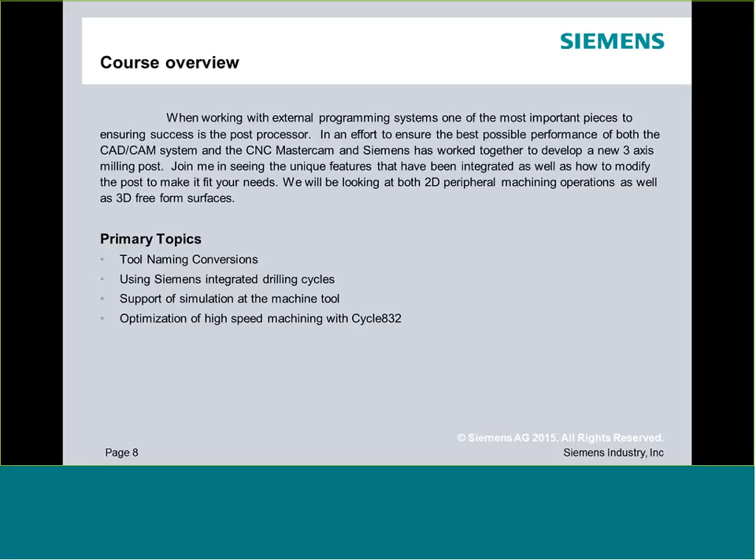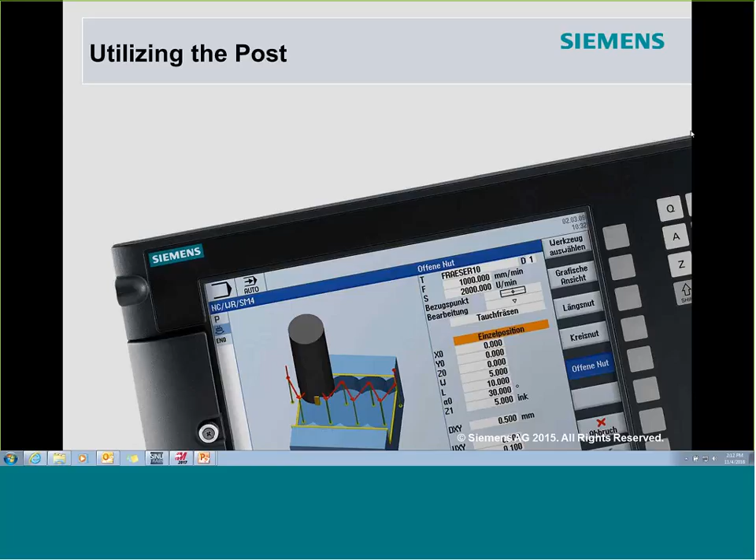So we're going to start with utilizing the post, with a couple simple scenarios. These would be the two examples we're going to look at. Again, these are pre-canned little routines that I came up with to give us some talking points and to show you some functionality. We're going to do some basic peripheral or 2.5D milling, and we'll also look at some of the free form stuff when we look at high-speed cycles, cycle 832, that kind of scenario.

Now the posts are supporting both X9 and the latest version 2017. So when we show you where you can get the post, or if you're going to request it from your distribution, you can ask for either version. We're supporting back to X9 and the current version.

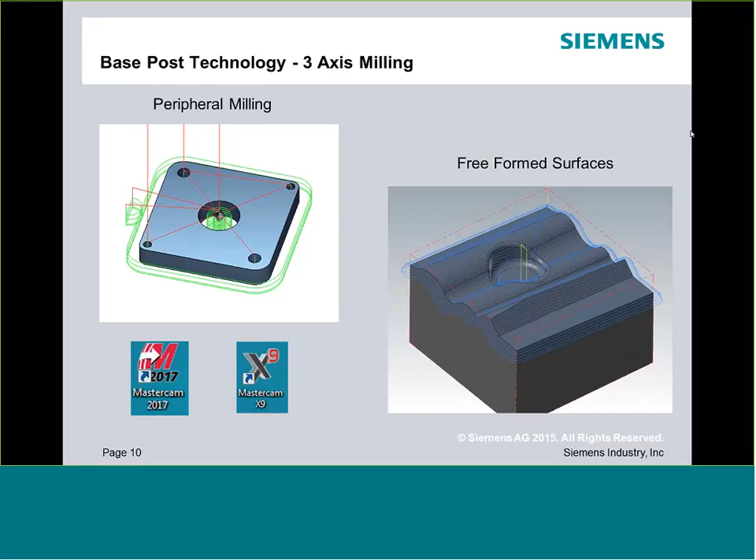So probably the first question you might have is, how do I get the post? How do I physically get the post? In the past, Mastercam used to just embed the posts in the install package. They still do that for the standard posts they have, but this new post gave them an opportunity to apply a different concept that they've been playing around with.

So what they're doing now is they're actually putting the posts up on a standard forum where you can go and download it yourself. This way, if there are any changes that need to be made for server, management control, version control, it's very quick and simple for them to make an update and put it up on the website. They don't have to worry about waiting for a new install package to come out.

So there's really two ways you can start to see this. First and foremost, if you go to the mastercam.com website and you select posts, you can drill down and get a full description of the post. And here there's some links where you can request this through a reseller. But additionally, if you have a login here, you see on the screen where we have register or login.

As long as you're a user with a licensed CNC Mastercam, you can have a login, and once the login is in place, you have the ability to go to what they call Tech Exchange. In that same pull-down under support, a couple spots below post, there's a section called Tech Exchange. In Tech Exchange, you can select the version you want, and it'll give you a list of whatever's available for the version.

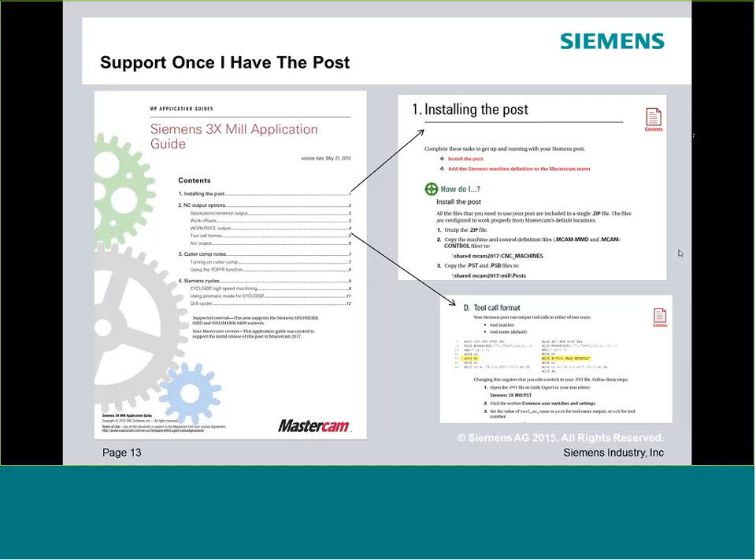So what are you going to get outside of the app guide when you download it? You're basically going to get these 5 files. There's the PST file. That is your post file. It's going to be called Siemens 3X mill.pst. There is a PSB file, and that's an encrypted file that goes along with the post. And then you have 3 other files as well.

Now, it's worth noting regarding the PSB file, there was some specific content in the post that we didn't want people to be able to potentially get into and mess up and affect the functionality of the post. So that's what the PSB is really doing here. It's not limiting the use of the post. As long as you have a legit seat on the system, the post processor is going to work.

In the past, some people used the PSB file to license the post to a specific seat. For us, this is a wide open post. It's going to work for anybody that has a licensed seat of Mastercam.

Additionally, you have your machine definition file. That's got the MMD extension on it. And you have a control definition file. Now, the machine definition file, there's 2 here. One supports inch, the other supports metric. Everything else is really universal.

So as we kind of go through this, the post file, the control def, that'll adapt based on whatever unit of measure you're in. I think older posts used to have unit dependent posts all the time, and then you're dealing with all these different posts and version control. So they're trying to make everything as unit independent as possible.

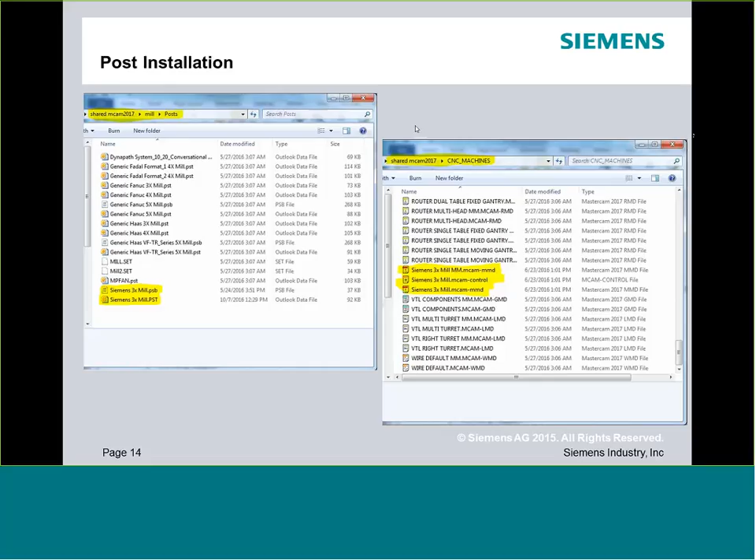So what are we going to do with this post? Well, this is going to be the basic job we're going to play around with. So we're going to take a very simple profile. We're going to do a little milling on the outside of the profile, a little bit of drilling, some tapping, and we're going to mill a hole in the center of it.

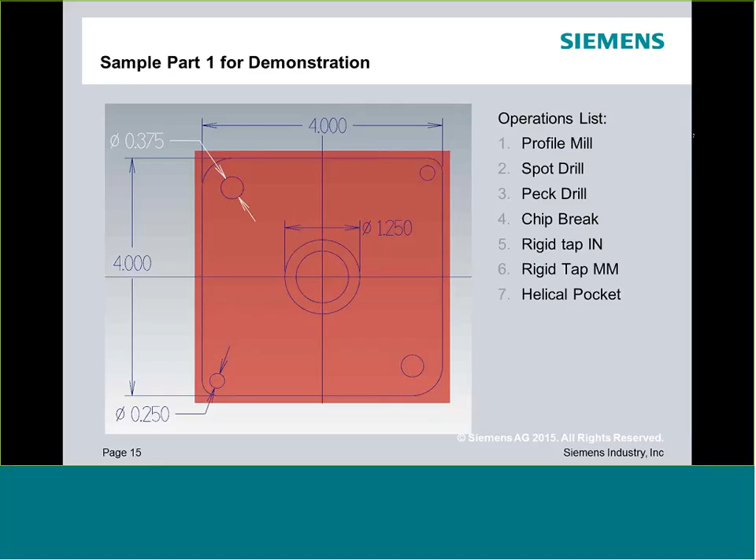So I just wanted to use this as an example to give us something that we can play around with all these different triggers that are starting to be built into this post, and you can start to see how you can tailor it. So first things first, why don't we just go through the process of grabbing the post, outputting some code. Let's get it over into our control, and let's do some initial simulation. This way you can kind of see the whole process that it would take, and then we'll start cutting it apart a little bit and showing you some of these different features or functions.

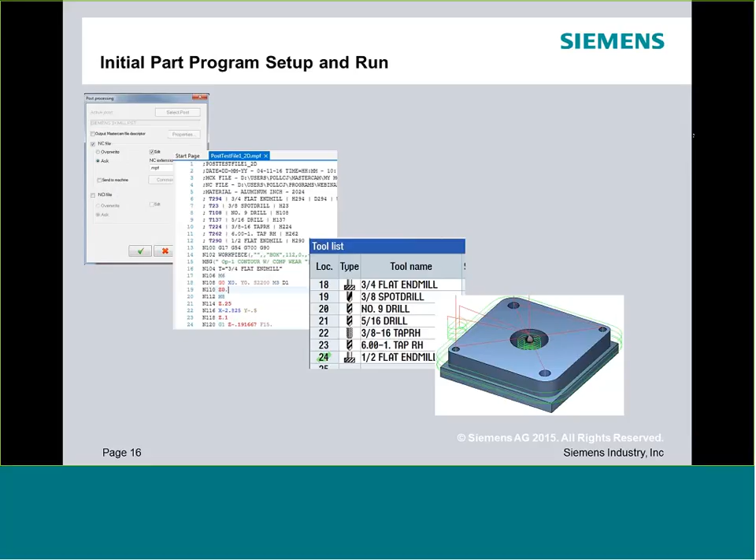So what I'm going to do here is I'm going to just switch out to Mastercam real fast. And this is the pre-created part. So I have a bunch of toolpaths built here. Now, I've already built this selecting the Siemens 3-axis post. Had I not, or I was doing a new one, I can go in and I'll be able to select the post. So right now, under mill operations, for argument's sake, you can see I have this post selected.

When you first drop the files in, it's not going to be in your list of whatever machines you may have selected. So you just go to Manage List, and you would find the post down here, and then it's a matter of just clicking it and adding. So in this case, I could add the metric one because I hadn't added it to my current copy of 2017. So if I plug that in there, now when you go in, you're going to get it propagated in the list. So you may have a bunch of different machine posts or control posts in here. Once it's in the library, now you can just pick it and go, and you're going to create an operation with that post.

Okay, so we have some toolpath. Let's just select this toolpath, and we're going to output some code. So here, just like you would any Mastercam file, we're going to select output. We will see the post name, so you would want to validate that. And let's post it out, and we can start to see what we're dealing with initially. Okay, so I'm just going to let it overwrite what I was playing around with before. And we are going to get our first output. Things always run a little bit slower when I'm logged in with all this stuff. There we go.

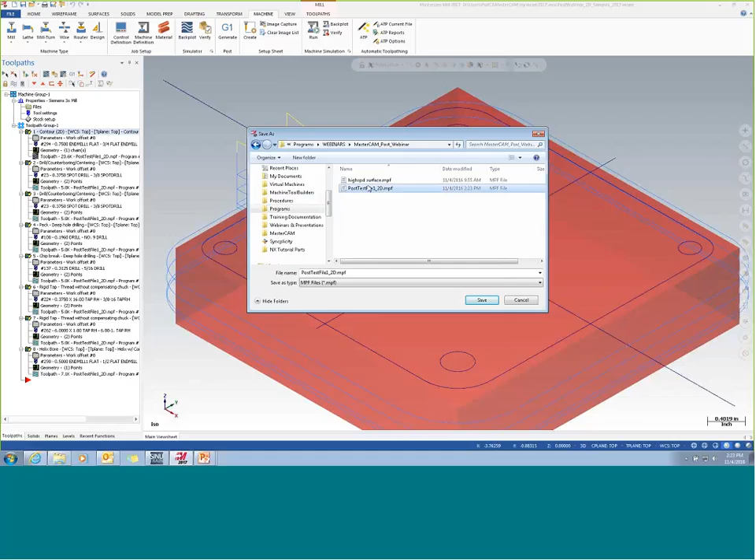I'm going to repick this. You always have this stuff all set and ready, you think, and then you make one little change and everything goes bye-bye. Oh, there it is. Oh, it should still be there.

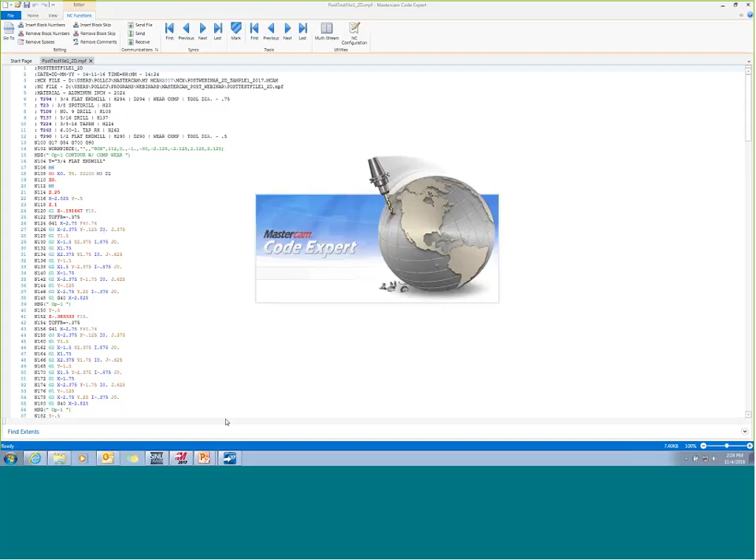Okay. Oh, let me reload this machine. It's like it's not updating in my directory on my end.

So what I'm using here right now while I'm reloading it, this is a piece of software we call SinuTrain. It's a control emulator, so basically it's going to emulate everything I can do on the control. Here I had built a simple little machine that I was going to use as my mock 3-axis machine, and I just created a shared folder. That's why when I was looking at it, I was seeing that I was posting that folder. It was certainly going into that folder, but I wasn't physically seeing it once I went into the machine, so I may have to just refresh it. Sometimes when I'm logged in, strange things happen when you're in these webinars.

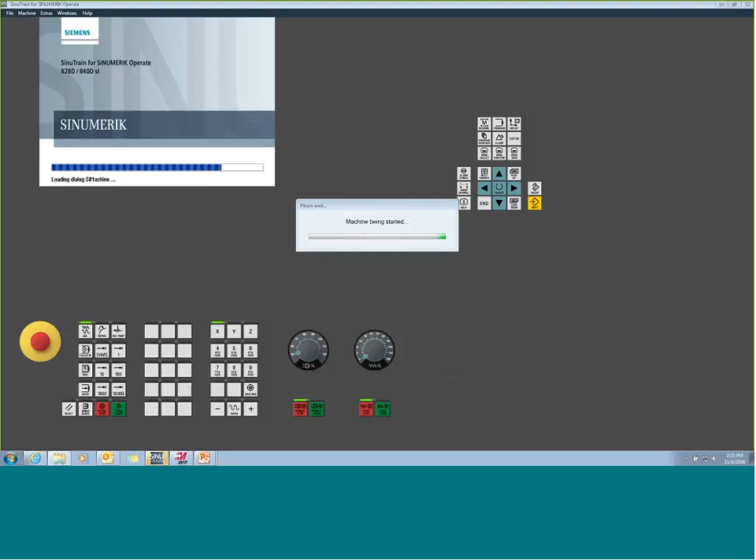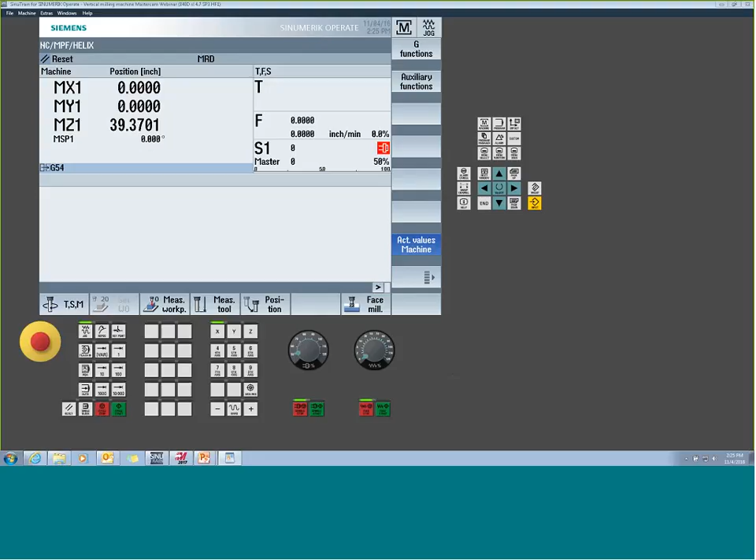Okay. So that is back up, and I just opened that file externally just to prove that I'm not absolutely going insane. And it certainly should be here. Okay, there's my webinars. Ah, there we go, perfect nougat, I like to call that.

Okay, so I output the file. Now, one of the things I'm going to show you, and one of the first things we wanted to show you that's kind of unique in the Siemens control, is we have the ability of calling what's called named tools. So you see right there in the tool call, the physical name I'm calling up in the tool isn't a number, it's this 3/4-inch flat end mill. Well, it's really nice that they're giving us a full list of the tool libraries, because when it's time for me to set up a part program to build the file, I don't want to have to go searching through the program to find out what the names were associated with it.

In the same token, I'm going to have to go over and create these tools. So what's nice is as long as this name matches the physical tool call, it's as simple as just copying and pasting the name over into our tool table. So when I go to build up my first run, build up my tool library, it makes it really quick. I can just come in, select the type of tool I'm using, and just copy and paste the physical name right into it. And that's how I would start to build up my tools.

Now, certainly I didn't want to have to go through building all 8 or 9 tools I have associated with this, so I just wanted to show you the one. But having that full library there available to us will quickly allow you to start to build up and get the tools physically in the machine. Now, it is possible that we could have created an external file and then run a part program to pre-populate that. That's certainly something you could explore down the road.

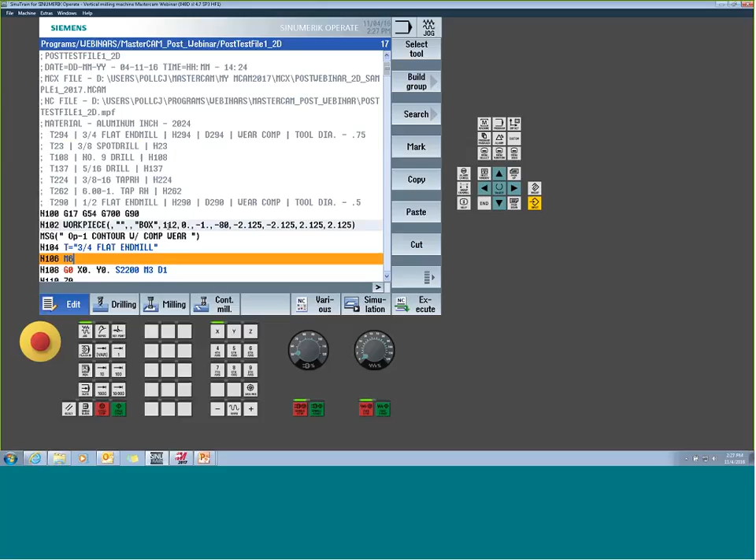Now, additionally, we've added some different things that we're going to start to see here to support graphic and so on. But what the end toolpath is going to look like for this job is going to be this. So here we come in, we start to see some simple profile milling, walking around an output. Then we're going to get to drill a couple holes, center drill, some peck drill, some chip breaking cycles, and then we tap a few holes. And we end up with a little helical interpolation.

So the post is already set up to anticipate all these different types of operations and handle them. But there are areas that you're going to want to tweak, that we're going to want to change around a little bit. Maybe you like the tool call we were talking about. Maybe you're a shop that doesn't like to use name tools, you want to use number values.

So what we're going to do is I'm going to show you all of these unique triggers that we've embedded into the physical post.

Bring up the PowerPoint. So when it comes to modifying the post, there's going to be 2 basic files you're going to modify. You have the control definition file. That allows us to do more global types of adjustments. Maybe I don't like the sequence numbers the way they're coming out, you can change that. Maybe I don't want to break up arcs, or I want to break up arcs every 90 degrees.

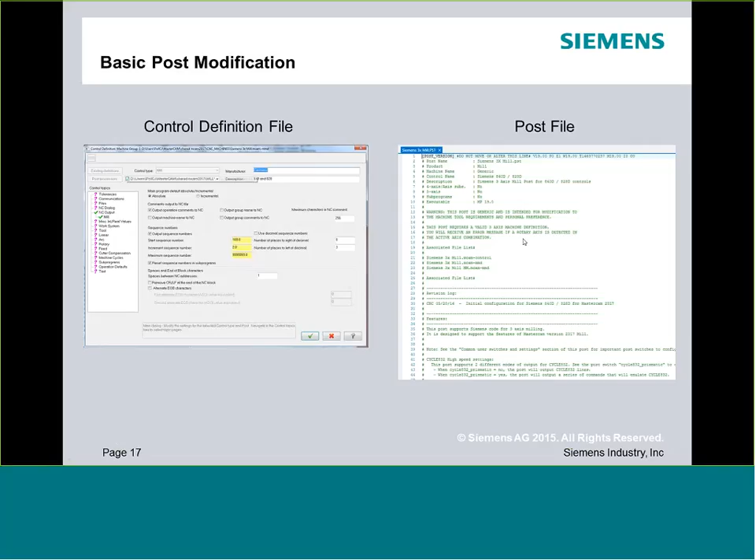Now, that kind of stuff you can change around the control def. But when it comes to really being able to modify the output, we're going to go into this post file, and in the post file we're going to start to show you some of these triggers that were embedded, and we're going to be able to modify or adjust this output by going into that given file. So what we'll do is we'll take a look at a few different features and functions, and then we'll go in, we'll modify it and output it, and you can start to see the difference in the result.

So first and foremost, we had to really think about compatibility and controls. I mentioned earlier that this post supports both 828 and 840, and there are some slight nuance changes between those two controls. So what we did, and that's why it was so important for both Siemens and Mastercam to partner together and not leave this up to maybe an independent reseller or even in times the OEM integrating the control, because who's going to know the Siemens control better than Siemens, and who's going to know Mastercam better than Mastercam?

So it really worked out well for the two of us to come together. We could kind of steer Mastercam in knowing where there might be areas that we want to pay close attention to. This is one of them specifically we're going to talk about here in a sec. And they can then tell us how we can fit the CAM system around these scenarios.

So to give you an example of just making sure we had commonality, one of the big differences between the 840 and the 828 was how we handle work coordinates. So both controls support G54 through G57. So what you see here in the Mastercam interface is if I manually drive the work offset and I give it a value of 0, I'm going to get an output of 54. If I go up through to a number of 3, it's going to give me all of those consecutive work coordinates up to G57.

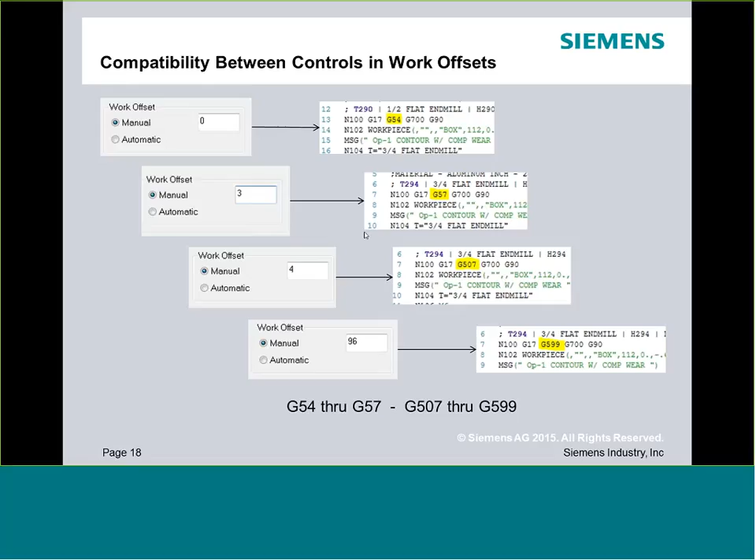So what we decided, to make it the simplest and easiest without having to support two separate posts over just a couple of work coordinate triggers, is that we would then jump over to 507 and then support from 507 right up through our extended 599. So it sounds like a very simple scenario, but if you don't anticipate this, now all of a sudden you can have a post in the field that's writing a G58 to an 840 and it's not going to work, or vice versa, writing a 507 to a 828.

So additionally, we started to say, okay, how do we handle tool naming convention? That's kind of tricky. We don't want to tell you that you have to adopt one convention or the other. So first, we wanted to see if we could support the tool naming convention, and that was pretty easy to get going.

What Mastercam was able to do for us was link the output name to the tool name that gets used right in the interface for developing the tool. So if you built a tool and named it, or once you bring it into your operation, whatever name is there is the name that's going to get driven out to the output code.

But what if I don't like named tools? What if I'm just used to, because I've been doing it for the last 30 years, using tool numbers? Well, that's okay. We're not forcing you to adopt this.

But what we did was we decided to put a trigger or a switch inside the post. So as we go into the post and take a look at it, you're going to see there's a switch called tool as name. And it's as simple as changing this to a yes or a no, and that's going to completely change your output structure.

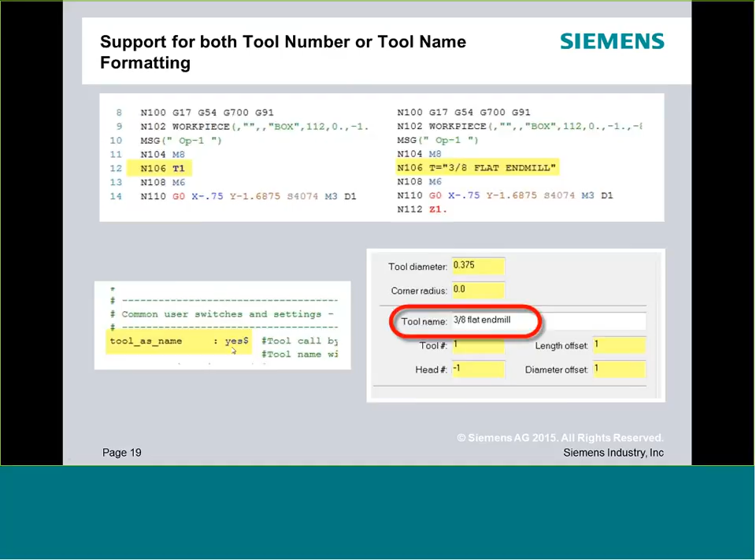So what we can do here, let me just switch back over to Mastercam, is we can start to show you where you find the triggers and how you start to modify them. And then we can start to see the difference in result.

So I'm just going to work on our contour one operation. If I was to look at the contour, physically under the tool information, I see that there is my 3/4 flat end mill. So this is the name that's currently being driven when I hit output. You saw it earlier when I output the whole program, it was outputting the T equals and this name.

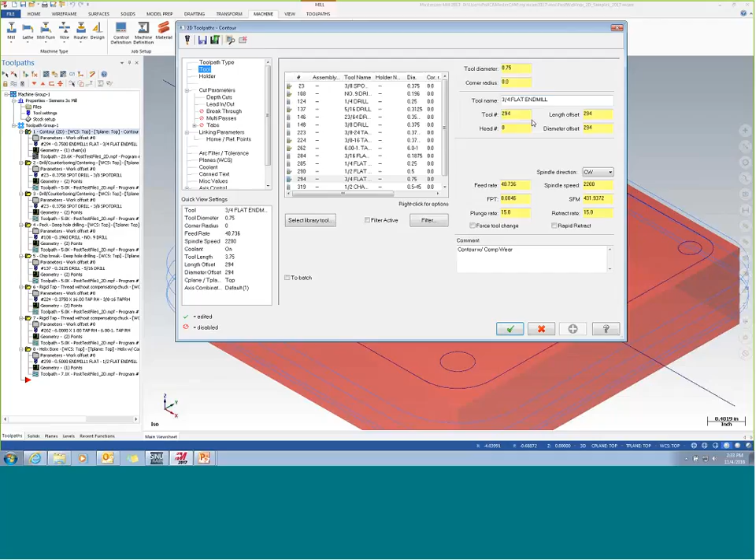So if I want to drive off the tool field, which in this case happened to have 294, it can certainly be any number you want, I now have to go in and change the post. So if I first post out this operation, or any operation for that matter, it's going to open up my editor. I'm just going to let it overwrite the file that I had there.

Oh, I have to watch this. I have the file already open on my end, so it's yelling at me that it can't rewrite the file because it's open by my other software. Okay, so let me just shoot this out again. Boom, boom, we'll overwrite that file, save us a couple key strikes.

Okay, so the editor comes up. You see here we have our standard 3/4 inch output.

So now what we want to do is open up that PST file, the file that you copied. You could open this up into any external editor, but you can also open it up right in Mastercam. If you use the Mastercam Code Expert editor, it actually puts you right to the correct path, so you don't have to hunt for it. But you do have to change your file extension type and make sure you hit Post Files.

From here, we're going to see somewhere in the list the Siemens 3-axis PST. Now, you're not going to see the PSB because you're not going to be able to edit that anyway, and you don't need to. We're just going to pick the PST file, click Open, and it's going to open up like a text editor here in the code editor.

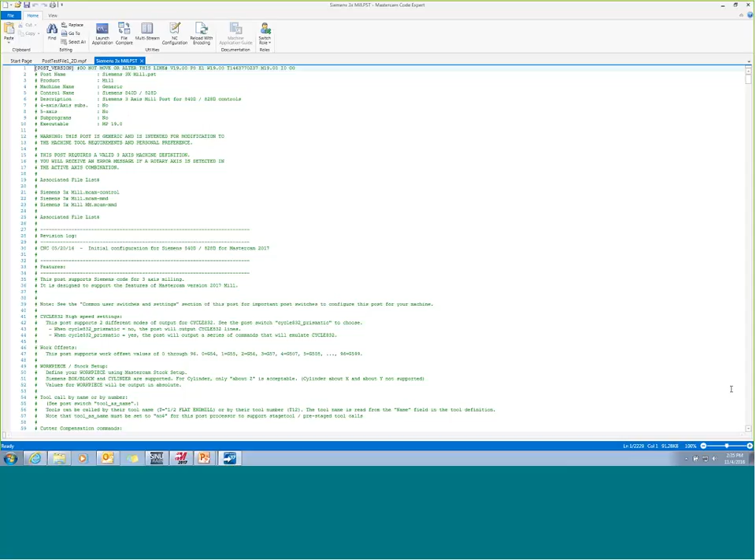Now, this first section is all commented out, that's what the pound signs are. But there's a lot of detail here. So if you want to start to learn what this post is capable of, all of these triggers are well documented with all the different features. Like for argument's sake, we were talking about the work offsets. Well, we see right here, G54, G57 is number 3, number 4 goes to 507. So there are a lot of great comments here.

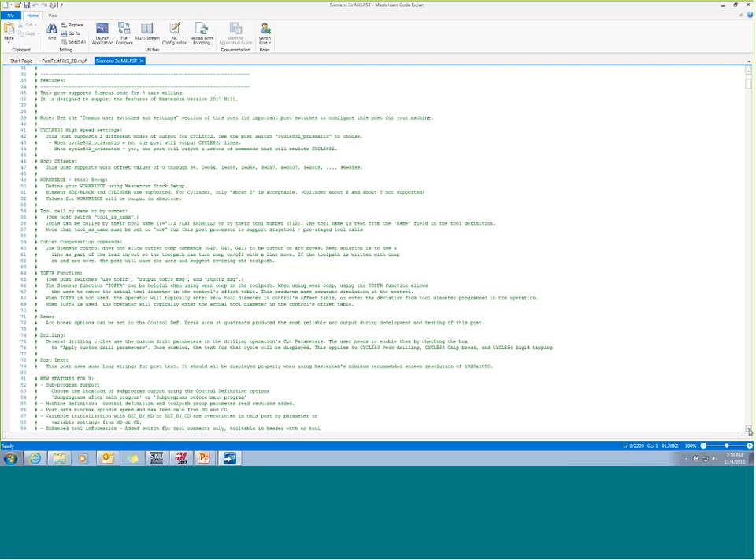So if I start to scroll down, it starts to talk about the tool naming, telling you how we handle some of this functionality. And then if you move down just past all the comments, you get to the start of the post, first thing you're going to see are these switches. And the switches is what's going to start to change this functionality.

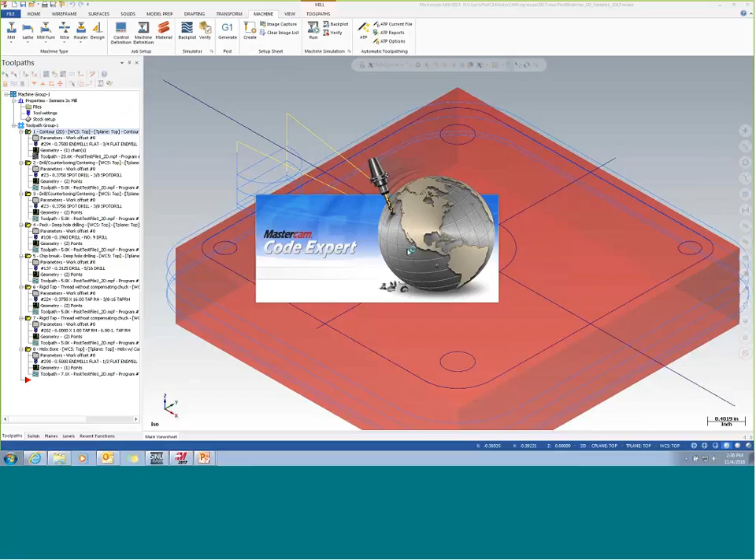So it's really as simple as coming down to where the system says yes, changing it to a no, saving the file, and closing it all up. Now if I re-output this file, you're going to see I get tool 294 as opposed to what we had earlier, which was my T equals 3/4. So there's my tool 294.

So now we can quickly adapt this post to how the user wants to use the system, as opposed to us telling them, well, you have to do named tools or you have to only do numbered tools. It's a matter of changing that trigger. Now, I want to say the default post, I think, comes out when downloaded with named tools set. So it's just one of those things you want to be aware of.

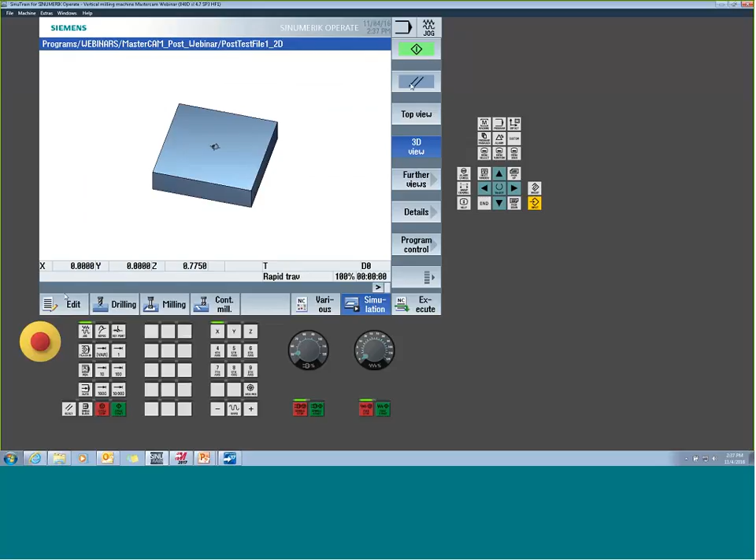Now, from the control standpoint, if I was to start running this file, here you see there's the updated one with 294. Well, 294 now has to exist. So if I go to simulate, it's going to tell me that tool is not there. So the 294, there you go, illegal tool number. The 294 is being driven by whatever is in these named fields.

So if I wanted to create a new tool, I could do that. I could rename one of the tools, but let's say I'm just going to create a new tool. So now remember, it's T294. Well, you're only going to put the numerical value, 294, in the tool name. The T is automatically understood. So we'll just make this a 3/4 inch tool, however many flutes I want.

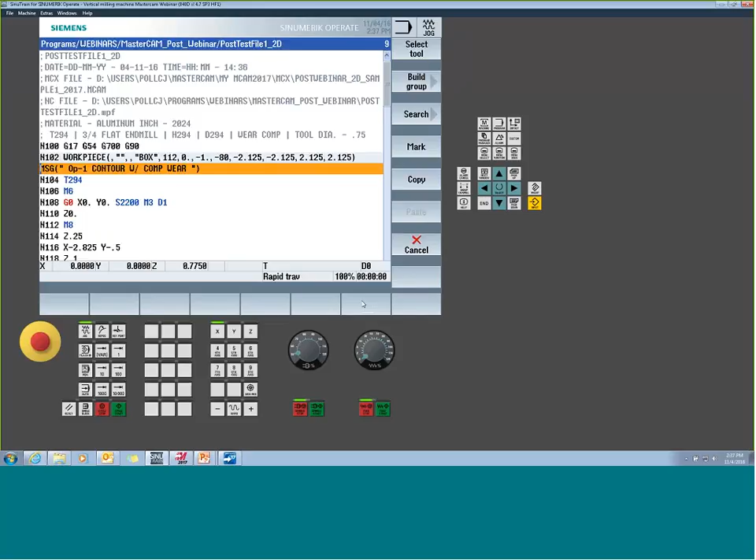Now if I come back, since 294 now exists, this tool is set up, we can start to simulate. I touch off some offsets, I could actually start to run this program. So we'll support either one. It's really up to you as a user how you want to adapt it. So there you go. So now we're starting to modify our post. I'm going to come out of here. We're going to switch back. And now we're going to look at how do we start to support the simulation.

So you've seen the block, the physical blank come up in our graphics. We were just looking at that. So how is that being driven? Well, what we did was we had to look at the way Mastercam has a bunch of different blank configurations, and we're certainly more limited to what they can do. So we really just kind of fit this around what we could support from the Siemens side.

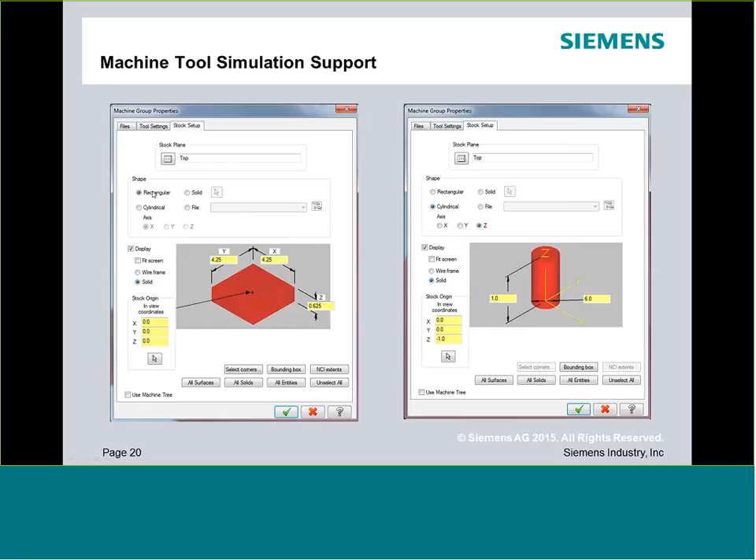And in Siemens, we support either rectangles or we support cylinders, and specifically cylinders oriented in a Z orientation. So as long as you choose either one of these two options, the end result is going to be an output blank line, which is called a workpiece, and it's going to be pre-propagated. It's going to support any of the orientations.

So, had I gone back to Mastercam and I looked at my stock setup, I can have my orientation point in any of the corners, in the middle. That's totally up to you. Bottom corner, it will propagate the right fields. I can pick cylinder. But had I picked, let's say for argument's sake, solid, then it'll actually tell me that it can't build it because we don't support that configuration.

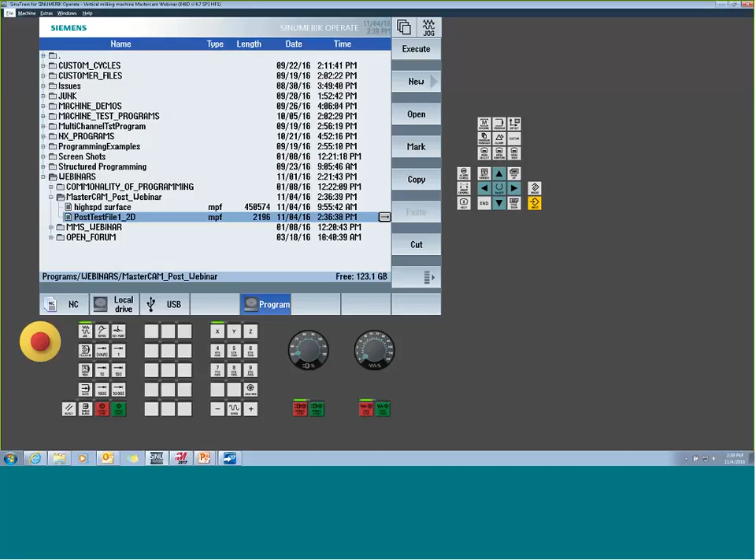So I can still use solids, I can still use files from the Mastercam side. The only difference is I'm not going to get a blank output. So if I look at the G code and I physically come in to this one, you just wouldn't get the workpiece blank. So from our perspective, you could see simulation as a wireframe. I could see the toolpath come around, but I'm just not going to get my visual with the physical solid model like you're starting to see here.

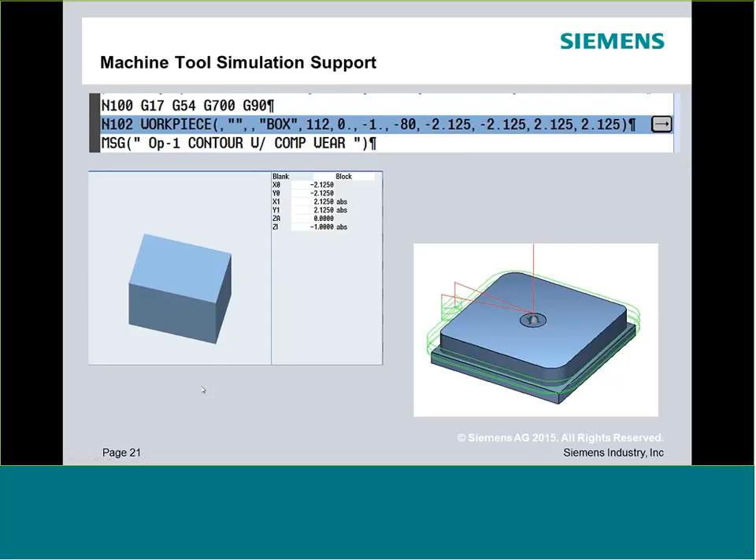Okay. So from there, we started to talk about tool comp. And tool comp can sometimes be a little challenging, especially when we're dealing with a control that has full 3D graphics and simulation. So we support all the tool comp variants, but the one that's always the stumbling block is comp wear.

So for those of us that maybe aren't familiar with the terminology, comp wear is always going to output a G41 or G42, but the toolpath output is already going to be offset by the tool radius that you used in your CAM system. So what happens is when we get to simulation on our end, we are going to expect you to give us the tool diameter or the tool radius in our tool table. This way I can show you what the size of the tool is.

But in comp wear, it's already been compensated, so they're expecting you to put a value of 0 in the tool table. Well, once there's a value of 0, there's no physical cutter diameter, and I don't get any simulation. So what will happen here, and you can see it in this little picture, you're going to go in, you're going to set up a 3/4 inch diameter, or the radius equivalent, depending on how your machine's set up, and you're going to run it, and you're going to get this huge output because you're going to get double compensation.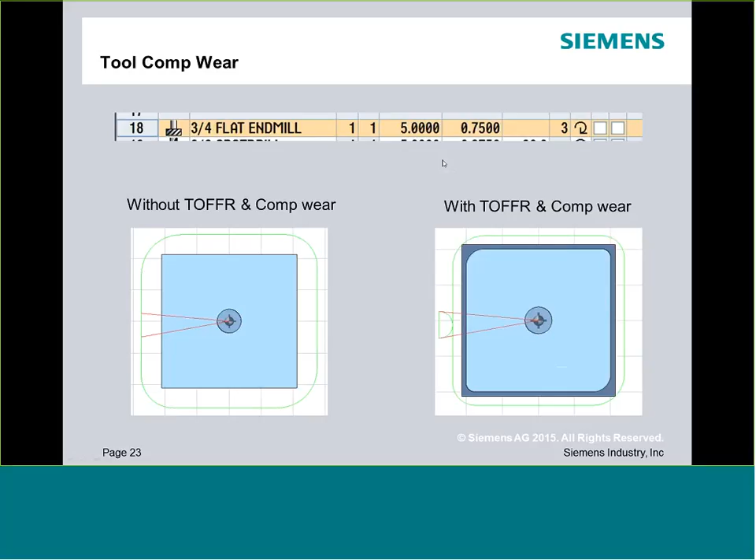So what we decided to do is leverage a little command called TOFFR. What it does is it allows us to modify the radius on the fly. And the end result is going to be giving you true toolpath compensation. I still get a physical comp output, but I now can give the system the full diameter. So we're going to show you kind of what that looks like a little bit. Let me jump back over to here. And then we're going to show you how to potentially disable it had you not wanted to use it. Some guys may be so used to always putting a value of 0 that they don't want to have this extra step, and that's certainly okay.

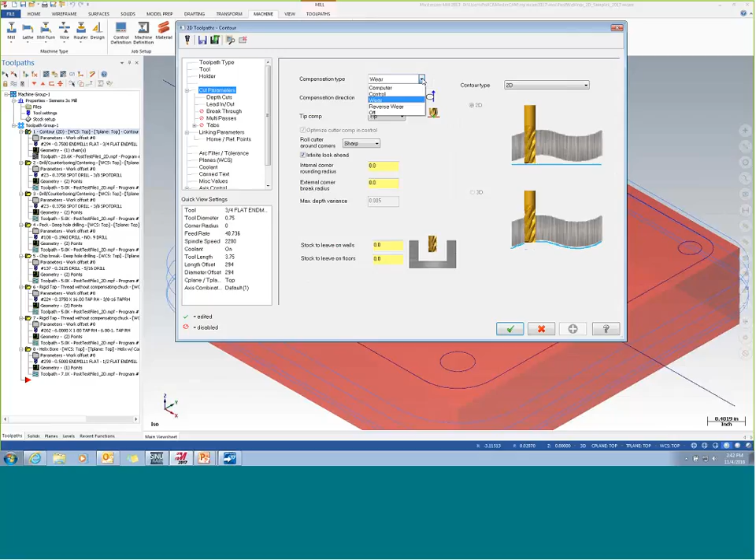So if you look at my program here, I have specifically selected wear as opposed to one of my other comp strategies. So if I go through wear, I output my toolpath, what you're going to see, because I have the trigger put up physically on, you're going to see a new command come in.

Did it again. Let me get out of here. Yeah. Sorry, guys. I got to remember to stop editing the file before I try to rewrite it.

Okay. So I output it. I post it. And what you'll see with the TOFFR function loaded, you will see this statement come out, TOFFR. And what TOFFR does is it says, modify the active tool radius. So we're saying, okay, you told me I got a 3/4 inch tool in the tool table, but I already know this toolpath has been compensated by .375, by half the tool. So we're just going to remove it. So it's kind of like fooling graphics. Simulation sees a full cutter diameter, but I don't get double the compensation.

Now, in this case, we have it output a couple times. This is not additive or cumulative. So once it's there, it stays until you adjust it, and it would get canceled on the next tool change. So if you happen to output it and it's a little redundant, it's not going to keep building on itself. That's absolutely okay. But what it's doing is it's now keeping us from getting that double compensation by this simple statement. Now, if you want to get rid of it, or you don't like that functionality, you can go in and we can certainly modify that. So that's where the other trigger comes into place.

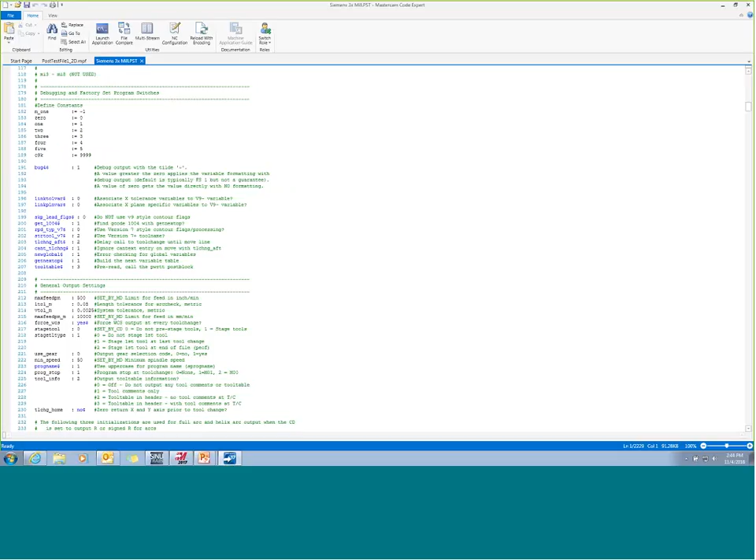So if I go back down to that same section that I had before, and we'll just run right down to it. One more step up. So we have TOFFR. Let me just bring it up on the screen a little bit more so you guys can all see it. So this is the same scenario, and if you read through it, it'll tell you yes or no. Now, we did put an extra message in here because if a guy's still not familiar with this functionality and it's at yes, you may want to warn him that this is going to happen, because he's going to go and put a 0 for his tool comp and he's going to get the other effect too. So we want to be careful that people understand exactly what this function is doing.

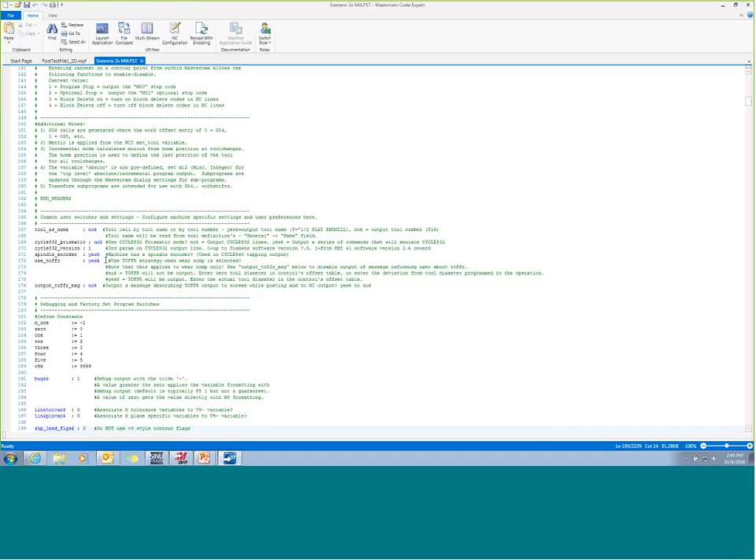So set it to no, it won't output the TOFFR. Keep it at yes and set this to a yes, and you'll actually even now get a warning that the TOFFR is active. So if I close that down and output it one more time.

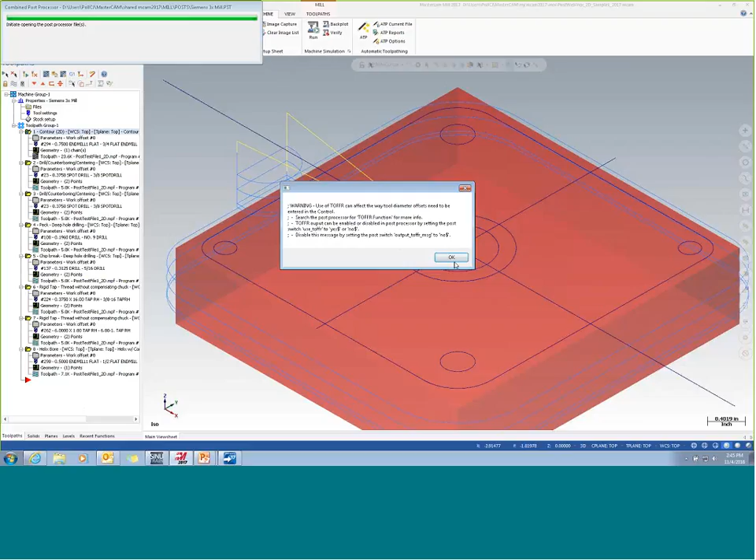So here's your warning statement, just making sure that you're aware that this function is being enabled. And if you want to, you can certainly change it. So now if you look at your output, we still have the TOFFR, but you even get a warning in the output command. So usually I would say keep the warning there when you're first getting used to the function, or maybe you have a couple different programmers using this post.

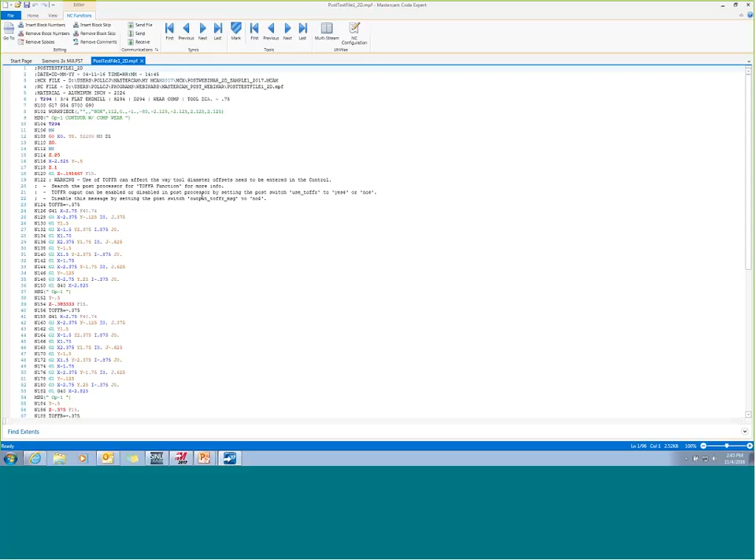Once everybody knows what's going on, you don't want to keep seeing the alarm. Go in, change it to a no, and the alarm goes bye-bye. So that's what I'm going to do because I know what TOFFR does. All right, so we'll set that to a no, save it, and we'll keep moving along.

50% of the tool. Well, in the Siemens control, it's one of the few things we don't allow you to do. And generally, you'll find with Siemens, we can allow you to do just about anything. But when it comes to comp turn on, we don't allow you to turn comp on during an arc event. So certainly we can't change the Mastercam HMI to keep you from ever doing this input. So what we've done is we've added error catching and error trapping at the post level to at least catch you, let you know that this condition occurred so you can go and make the change.

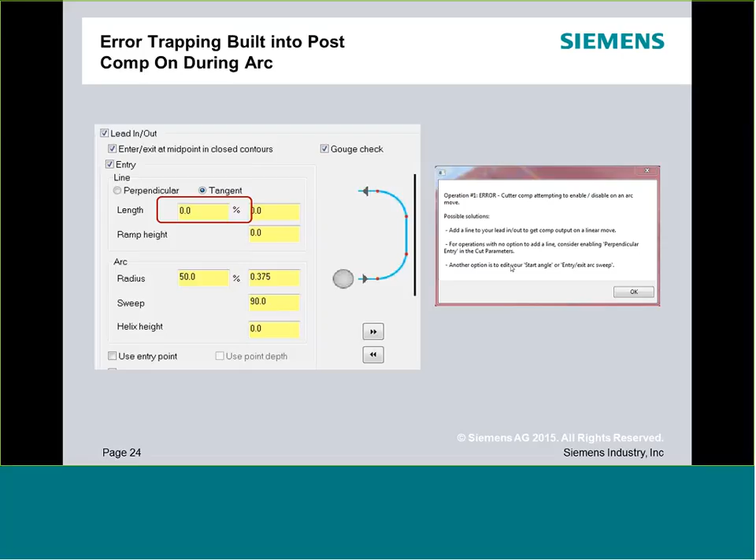Okay. So from there, we have all of our drilling cycles, and we spent a lot of time making sure that the cycles are supported and supported properly. Now, it's worth noting that this post is written for standard Siemens language, Siemens protocol. We do have a mode that a builder can turn on if he wants to, called ISO compatible mode. And ISO mode is going to follow more of your standard ISO protocols, your G81, your G82. We did not comply with that. We complied with our standard Siemens protocols. And we went through a lot of pains to make that happen.

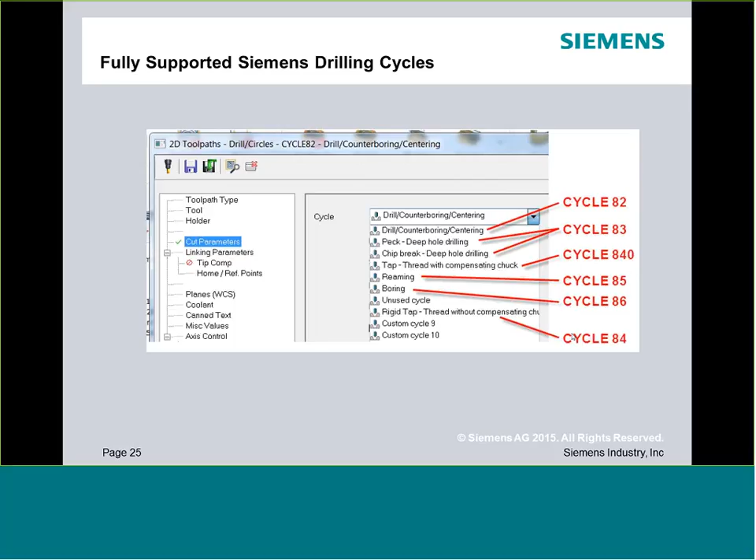But the reason being is there's a lot of advanced functionality in the Siemens control you get when you run in our mode that you don't get in ISO. The other problem is you don't always know that the Siemens controller had been commissioned for ISO mode. So from a post CAD/CAM development standpoint, you could say that you're going to output ISO and drop it in a machine. It may not run. It really all depends on if the OEM decided to support that mode. So by utilizing our standard cycles and embedding them in, we get really the most capability you're going to be able to experience from this post. So we're supporting all of our standard drilling cycles, as you see here.

Now, one thing you want to pay attention to, depending on the cycle you're in, what we had to do is we had to use the Apply Custom Drilling Parameters section to get more variables. If you know Siemens at all, you know we don't give you one way to do something, we give you 10. And we don't give you 3 triggers, we give you 30. Because it is an advanced control, there's no shortage of functionality within our canned cycles. Well, because of that, we did certainly run into scenarios where we just didn't have enough real estate to turn everything on. So what you want to make sure is when you're first starting that operation, that you select the Apply Custom Drilling Parameters.

Now, if the cycle doesn't require it, that's okay. You want to leave it on anyway. But you'll see here, like with the peck drilling, once I click the Apply Custom Drilling Parameters, the fields will pop up, the extended fields. And that's important because there's going to be stuff down here you're going to want to make sure you pay attention to when describing the canned cycle.

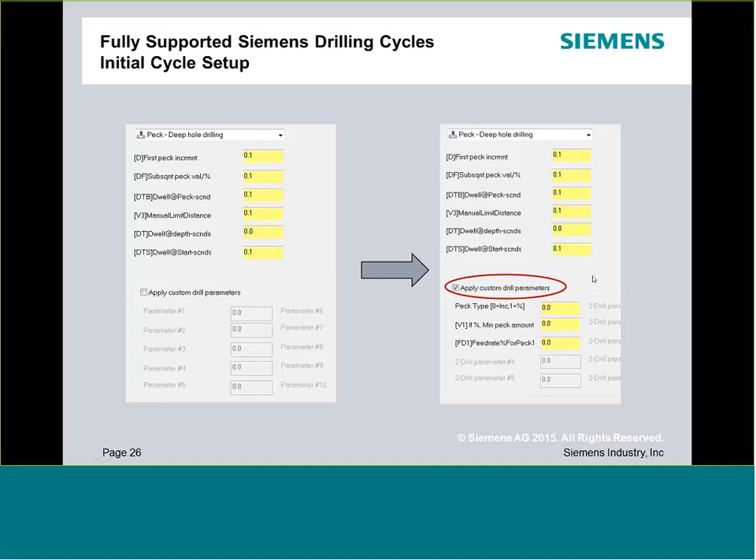Now, what's nice about working with the canned cycles and what we did from Mastercam's HMI side is we tried to get everything to align. One of the big benefits to using our cycles, and they read like this, like you see in the top. This is how you would see it in the physical control. MCALL sets up modal drilling, and then it's going to say CYCLE83, and then a bunch of variables that are comma delimited. Now, it's never intended for an end user to edit anything in here.

This is one of the things you get when you're running in Siemens mode that's an advanced functionality. You're actually getting conversational functionality embedded into G-code. So if I simply open up the cycle through our editor on the control, I get this input screen. And this is what we call a data mask. This is a conversational screen that allows me to write the drilling cycle.

Well, what we did was we made sure that all of our names closely matched our descriptions. And we even went through and added in, if I have a variable, here you go, D, for my first peck increment, we put in the D here. So as people have familiarity with the control, or are just moving from the control to Mastercam, there's going to be a commonality here that really emphasizes and streamlines learning the cycles.

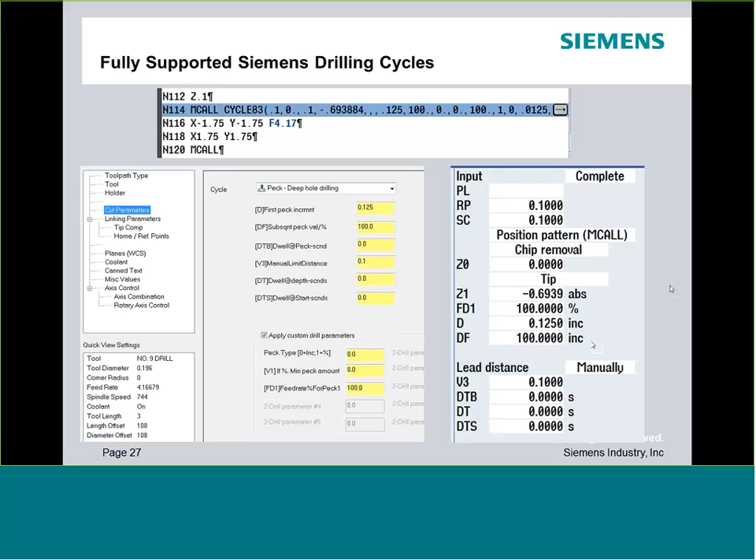It makes it a lot easier instead of having to understand, well, it's called something in Mastercam, but it really is going to do something totally different in the Siemens control. We really went through all the cycles and tried to align them as much as we could. So this is what you would physically see in the control. We'd see the output cycle, we'd open it up, and we can now go through and make any changes we want conversationally, and we'll see that all the variables are matching within the two systems.

Okay, so before we get into this, why don't we take a quick look at some of the cycles we are supporting. So I'm just going to output a few toolpaths. We'll come right down and we'll do some drilling, some peck and chip breaker, and some rigid tapping. So I'm just going to create a part program. Let me make sure that I didn't leave it open. I didn't. Good. I'm just going to let it overwrite the one we had.

So as we start to output the toolpath, let's open up the file. Here's our different operations. So we're going to do some spot drilling, drilling 2 different size holes, and then we're tapping 2 different size holes. In this case, I was tapping an inch thread and a metric thread on the same part. So this is what I was just talking about. You've got your MCALL cycle.

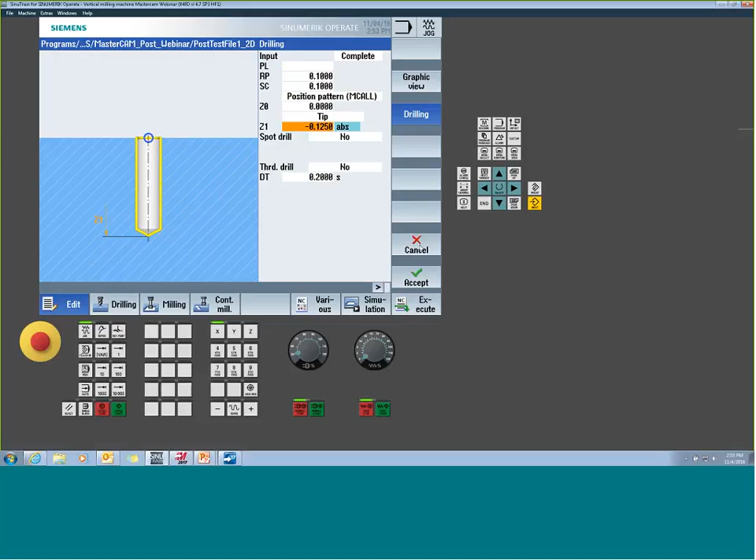So as long as the post is complying with our protocol, you can open up the cycle right at the control, and here I can conversationally make any editing changes I want. I know exactly what variable I need to switch back in Mastercam because the variable names are all matching. So you can quickly and easily support the system. Now in this case, this is a simple center drill. So this is just our basic drilling routine, what we call CYCLE82.

Further down, we get into some peck drilling. So there is our CYCLE83, and this goes into the peck drilling. So you can see how there's all kinds of different variables we support when we get into the drilling routines. Additionally, the same CYCLE83 is used for chip breaker. So that's triggered right here with this field, chip removal with chip breaker. So that's part of the things we're able to do and adapt in supporting these cycles.

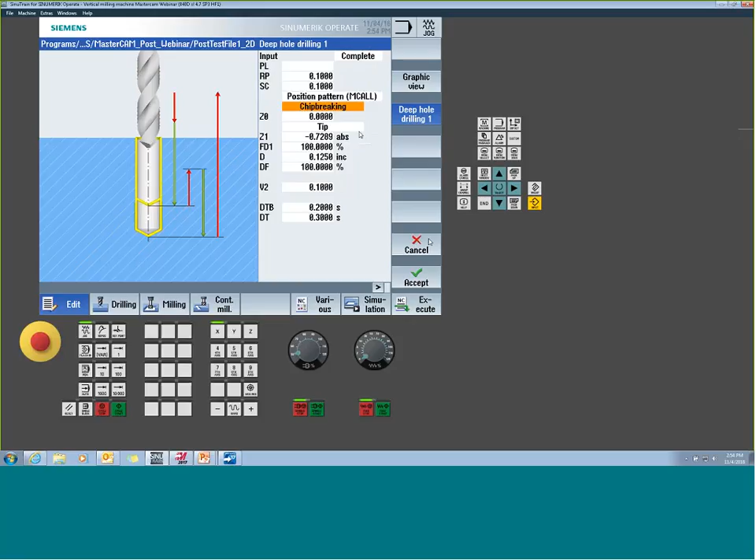We can change that, and it's writing to the same cycle, but changing some of the variables. So you see different variables pop up. We had to anticipate all that when we developed these cycles. Additionally, we're supporting soft tapping and rigid tapping. In the example I have here, this is just rigid tapping, but it does also support the soft tapping variant of it. So here we can go in.

Now this one happened to be set up as an inch thread. So here we were doing an inch pitch, and then later we were doing a metric one with a 6mm drill. So here we come in and we see, now in this case we're outputting the conversion. I think I have them backwards.

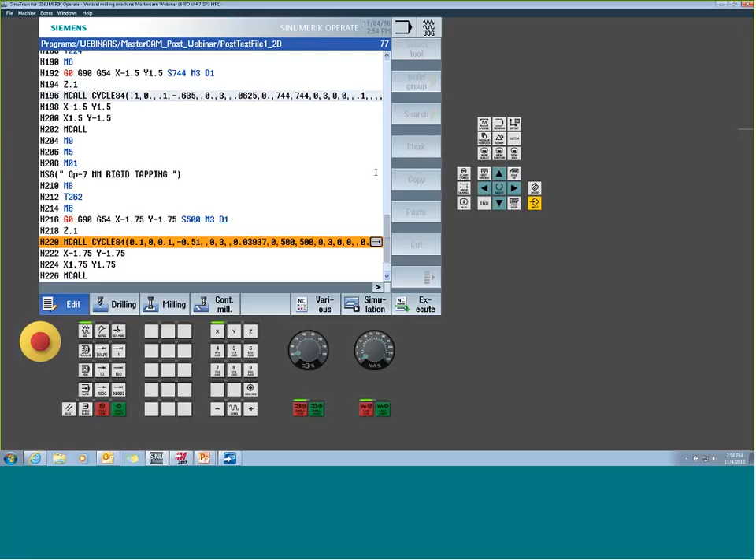Looks like I have left the naming at my tool numbers. So that's how we started to support the cycles. The cycles are embedded in that post file. They could be modified down the road if you maybe need to support some newer triggers.

Certainly in Siemens, we're always adding functionality to our cycles. There actually was a bunch of new stuff that was just released for 4.7. So we'll be able to adapt the post quickly and start to support some of these upper functions as well as we move forward. Okay, now the next area I wanted to talk about was getting into a little more advanced toolpath with 3D specifically.

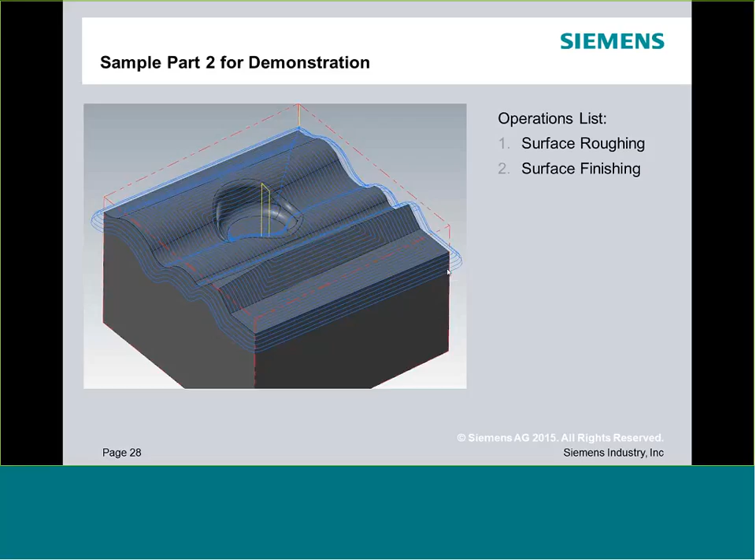So here we got a very simple part, just throwing some 3D surfacing at the part. And specifically, we're going to show you some of the things that we did and we anticipated when using some of the advanced high-speed cycles that are built into the Siemens control. So first things first, we decided we wanted to support our Cycle 832, which is our high-speed machining. But we wanted to see if we can make this as simple and easy for the user, the operator, to start to apply.

And the first thing we looked at is, well, you in Mastercam know what you're picking, right? You know you're picking a roughing strategy or a finishing strategy. So why should we then force the user to have to tell us that Cycle 832 is going to be in a roughing or a finishing strategy? Why don't we make this as automatic as we can? So that's exactly what we did. So the first setup is going to apply automatic mode.

Now, I'm going to show you how to go in and trigger this and turn this on. Once I go into the cycle, I'm going to go to the miscellaneous values section in Mastercam. I have an option field here. 0 is automatic, 1 is manual. And it's as simple as changing this from automatic to manual. So as long as this is at a 0, I don't have to fill out anything else. The system will automatically figure out what operation I'm in and then output the appropriate toolpath.

Sorry about that, guys. Output the appropriate toolpath, or shall I say, Cycle 832 setting to match that toolpath. So what I would see here is I'm allowing it to be auto. I'm in roughing, so my strategy output is actually a roughing strategy. We set it to what we decide the appropriate tolerance should be for that strategy. And there's where I would see the output.

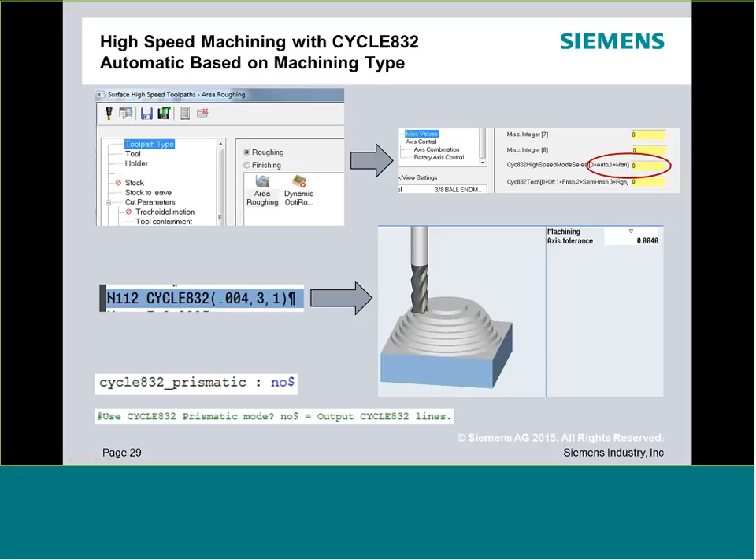Now there are some additional modes. This is being triggered by this Cycle 832_Prismatic trigger. So back in the post, as long as this is at a no, and it says right there in the comment of the post, it's going to output the Cycle 832 line. Now, additionally, we also wanted to give you the ability of overriding these values, because you may want to choose a semi-finishing strategy.

We support 3 different strategies of toolpath when I do high-speed: roughing, semi-finishing, and finishing. Well, Mastercam supports either roughing or finishing, and then you would obviously have adapted your step-overs and your strategies more toward semi-finishing, but they don't have an option as far as the cycle is concerned. So this is an area where we wanted to be able to manually override the output.

So again, in the miscellaneous values, simply putting a value of 1 allows me to pass through some different options. So here I can set what my machining strategy is: 1 for finish, 2 for semi-finish, 3 for roughing, and then what my chordal tolerance is going to be. And that'll directly output into Cycle 832, and I can see that right at the control.

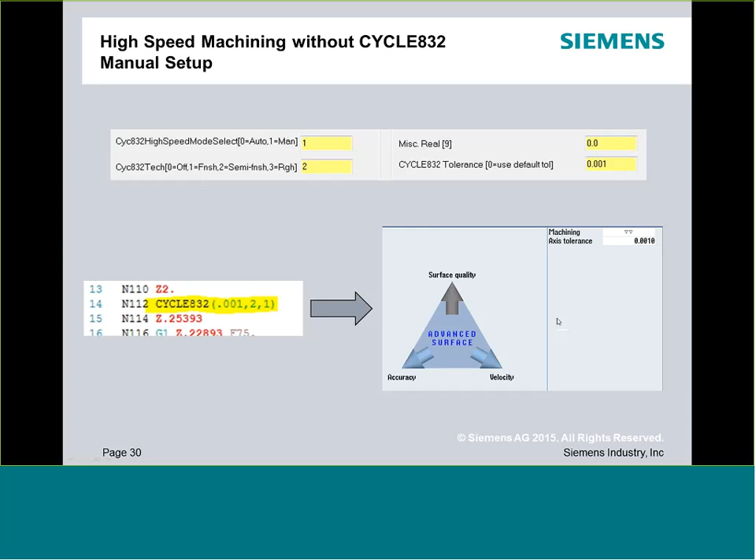So if we look here, and we jump over to Mastercam, let me just make sure I get out of the program. I'm going to now move over to this high-speed program. So let's open up that one. Sure, we can save this.

And this is my little high-speed sample, nothing all that fancy, just to give us a couple operations to play around with. So when I edit one of the cycles, for argument's sake, I go down to miscellaneous values and look to see what this is set to. Now, the first time you come in, it may be checked off, so you want to uncheck this so you can manually override these miscellaneous values instead of letting them just default to the post variable. And I can come in and make some changes.

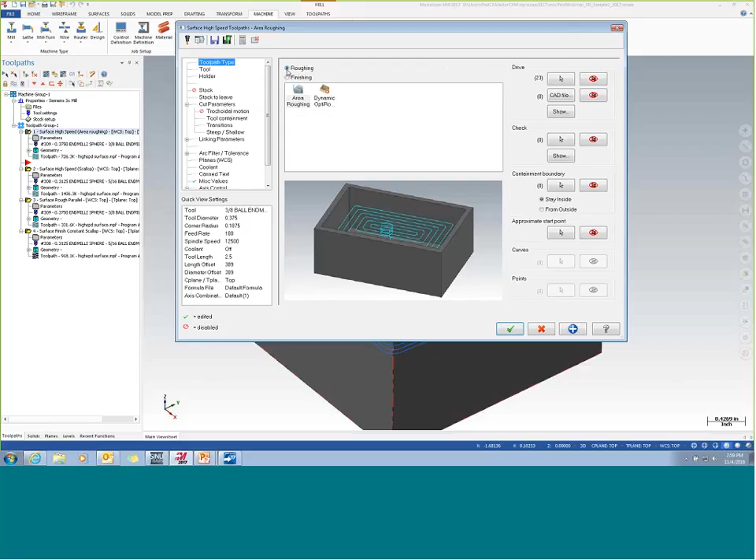So as long as I have this as auto, it is going to look back at whatever type of toolpath I have selected here. So here I have a roughing toolpath, my miscellaneous value is at auto set. So if I post this cycle out, we're going to just let it overwrite that one. That's fine.

You're going to start to see, let me open up our cycle 832. This might not mean a lot to you without opening up the data mask, but basically this is where we're passing through our chordal tolerance. We then have a numerical value that matches the roughing, and that's why in the description we said 3 is rough, 2 is semi-finished. That's the variable that gets passed on our side. The third place is really more of a version control segment, so normally this would just stay at a value of 1. This does change when you get to 5-axis toolpath, but right now we're only talking about 3.

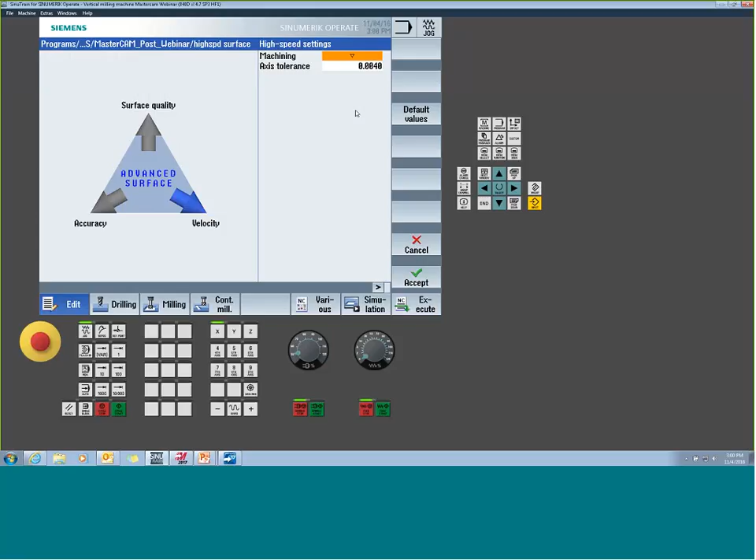So physically at the control, if we were to look at the output toolpath, here I can come in and see it's picked this strategy. Now, the end user can certainly override it - that's the beauty of being able to output to these cycles. So I could maybe change my tolerance here, and it'll rebuild the cycle.

Now, speaking of version control, you see how this now goes to _rough. So we, on our side, have changed a little bit cycle 832. We used to use just a number value, now we use a named variable. But depending on the version of software you're running, that could give you a compatibility issue. So this is another area where we thought about all the versions that are out since it came into effect, and how do we comply with something that will work with everything. That's why we're using the numerical value in the post.

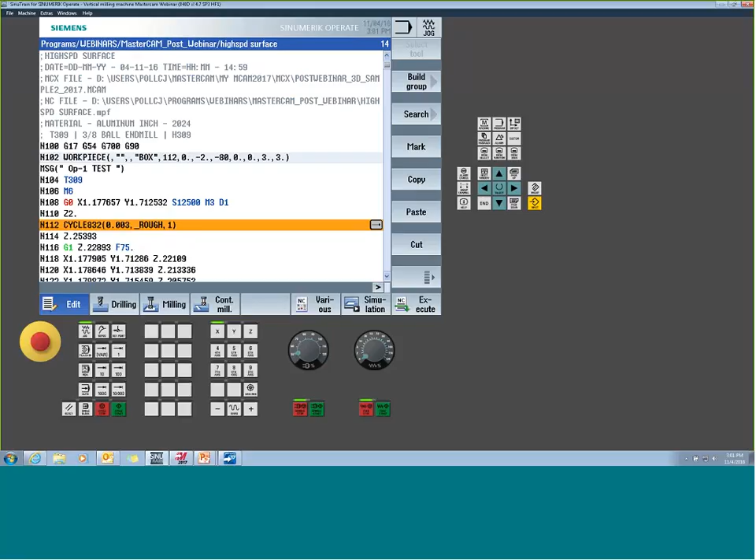Okay, so if I start to look at it a little bit more, we can certainly bounce between those two different triggers just inside of our parameters field. But one of the things we started to think about is, what if somebody doesn't want to use cycle 832, but we want to get some advantages of high-speed functionality? And that actually can happen more than you might realize. For one, cycle 832 is an option, so you may just not have the option in your control - it depends on the control that you have. Maybe you have it, maybe you don't.

Number two, what if we're dealing with legacy controls? Cycle 832 has been out for a little while, but you could potentially be outputting to an older machine, and maybe it's not fully supporting it, or it's not supporting all the triggers of the latest version of cycle 832. And then we get some cases with maybe some lower level or entry level machines where they're just not really set up properly to run cycle 832.

So what we did was we created this prismatic mode, this prismatic machining mode. And what it does is it lets you now start to trigger the unique functions that build up cycle 832 without being dependent on cycle 832. And that's where we have that switch, that trigger that says cycle 832 prismatic, yes. So remember I said earlier, you set it to a no, it's going to use 832. Well, this is why it's named what it's named, to support this function.

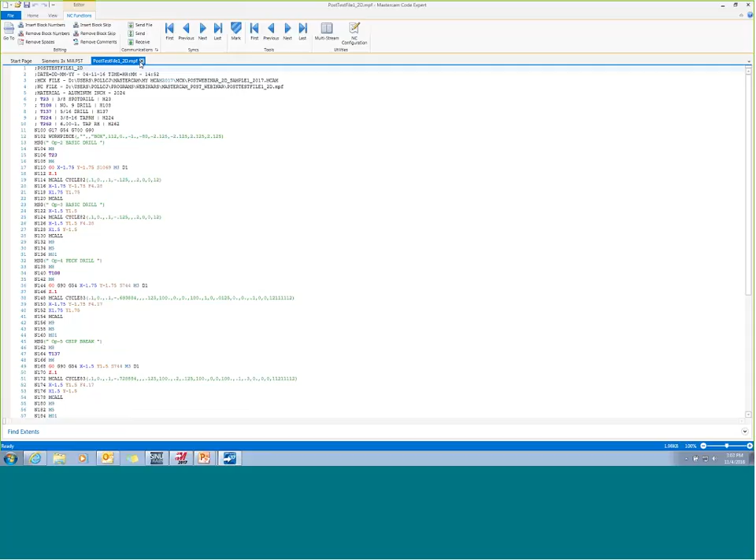So what will happen here is by coming into my post processor, I can close that, and let's close that. All right, I want to just change my names back to yes because I like that better. Okay, so you see where we have prismatic mode at a no - if I simply change this to yes, now our toolpath is going to start to output these different settings.

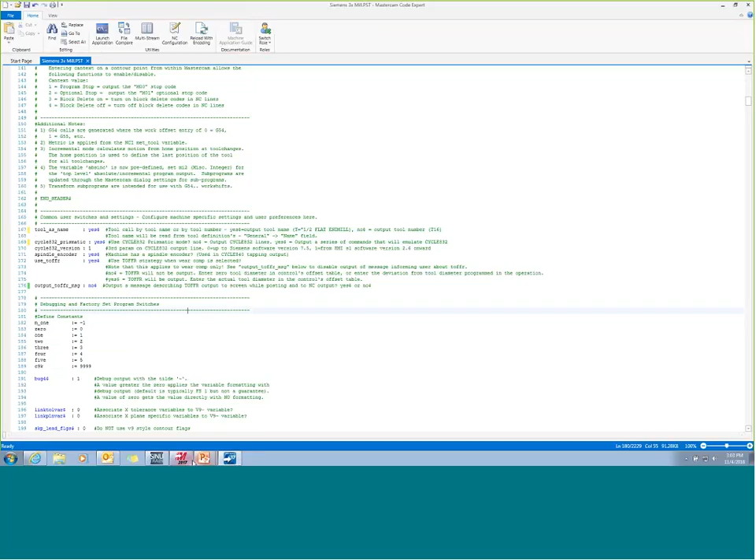Now the triggers that you just saw - if you look back here, we have the ability of changing the 0, the 1, the 2, the 3. There are unique strategies that we've preset that we feel are a good starting point if you are going to want to try to use this mode and not use cycle 832.

But this is going to require more customization if you want to run the machine in this mode. One thing I would absolutely make sure I do is confirm the machine OEM is okay with the commands we're using. One command you might see here is called brisk. On some higher-end machines that have been highly optimized from a servo tuning standpoint, you turn brisk on and you'd swear that machine's going to walk across the floor—it's responding that quickly. So you'll find some builders don't ever want you to run brisk.

You need to know that kind of stuff when you're working with this. Also, if you need to get to this level of customization, I wouldn't suggest doing it as an end user using this post. This would probably be something better left up to the reseller who can support you with it. But it's all right here, all available for our customization.

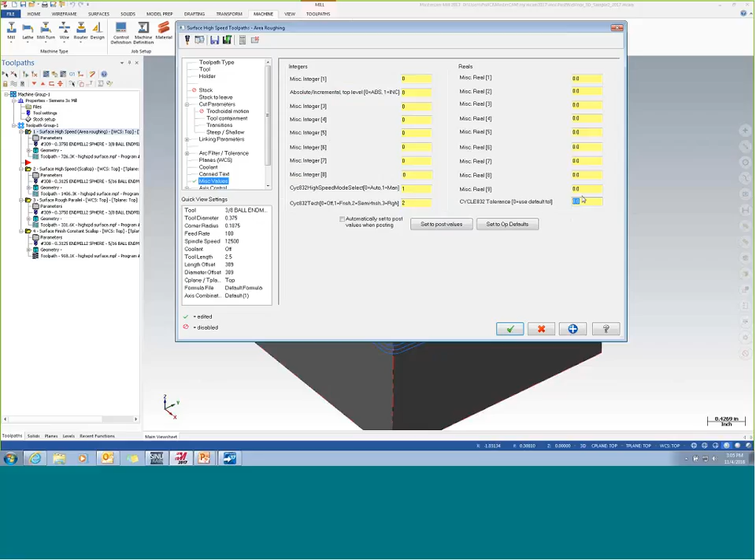So if we go back and I now output it, I can still use the manual or automatic. Let's say I chose a manual strategy—I'm going to use a semi-finishing routine. Now, the tolerance itself is hard-coded when you get to Prismatic, so this tolerance field isn't going to do anything. That's only applied in cycle 832, so it doesn't matter what I leave this at. Now if we output it, physically post out this post, we'll just overwrite it. That should be good—save us a couple of clicks.

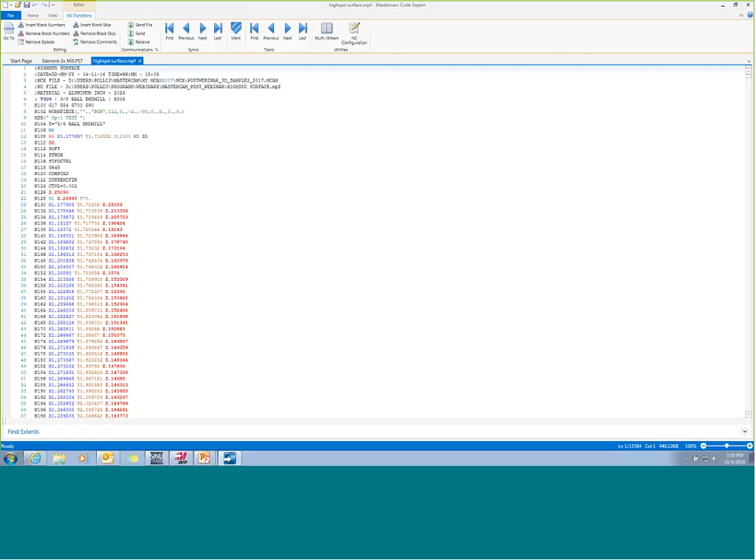Bring it up. Let me zoom in so you guys can really start to see it—hopefully that makes it a little better for you. Here is what's replacing that cycle 832 call: we've got a couple different corner rounding strategies, feed forward function, turning on a buffer control, turning on our compressor. This is where it's important to know what all these discrete functions do, because if you don't have cycle 832, you also don't have this compressor potentially. That's part of the advanced surface option.

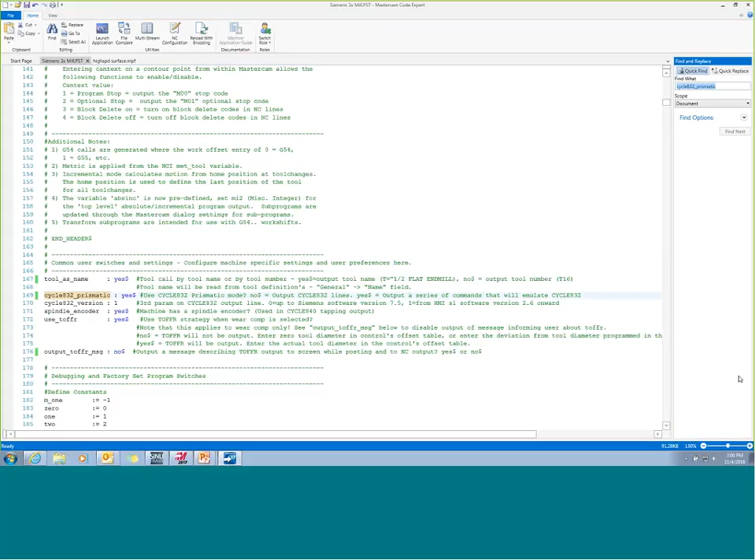So this potentially will need to be modified depending on how you're applying it. Now, where does it get modified? Well, it's right here in the post. So if we go back to our post, I'm going to zoom up a little bit. If you want to find the segment that's controlling it, what's really quick and easy is to just highlight Prismatic, or any of these functions if you want to dig a little deeper. Now we just do a Control F, and it's going to bring us down to the section in the post where all this stuff is hard-coded.

So we have really four different strategies: a deselection mode, that's turning it off once it was turned on, and then our finishing strategy, our semi-finishing, or our roughing strategy. We're hard-coding all these variables here. So once you decide what is most appropriate for your machine tool, or the machine tool you happen to be working on, come into this section and make the changes here that will better match the machine.

But this is going to take a lot more customization and a lot more knowledge of the machine. And don't assume you're going to make the machine run better by tailoring this—you're never going to run better than cycle 832. We only put all this trickery in to support older systems or poorly commissioned machines. But at the end of the day, cycle 832 is there for a reason. We put it in because guys could never get all these functions set up right. So now it allows the builder and Siemens, us, to really get your machine set up for the best possible condition to give you the best possible performance.

So again, I am strongly recommending, if you have cycle 832, that is the mode you want to run. However, if you don't, or there's a problem you think with cycle 832, this function was embedded here for that specific reason, so we could start to anticipate that kind of stuff. Okay.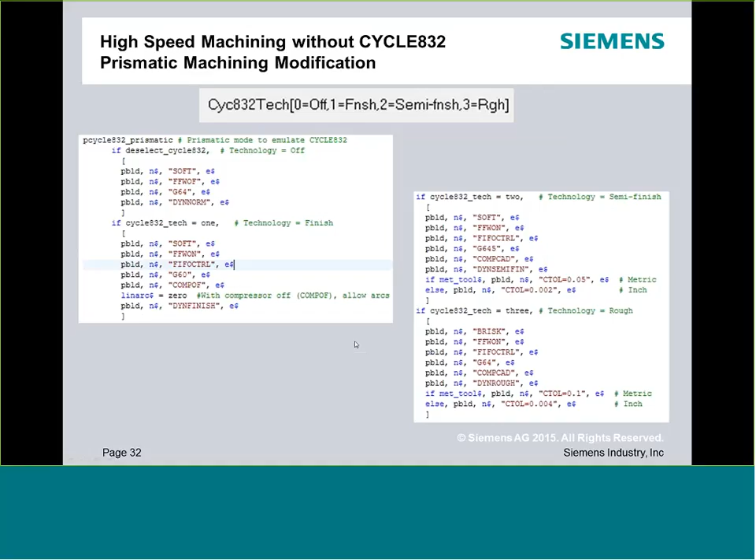Well, we went through a lot of different material. Hopefully you guys certainly found it educational. Obviously my hope here is those of us that are starting to utilize this post will be able to really take advantage of some of the key functions and features.

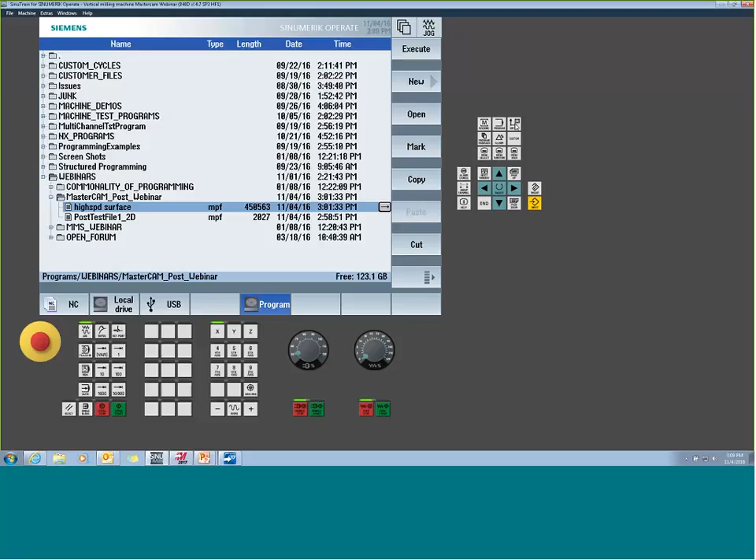Looks like one of the first questions I have: what is the advantage of name versus number for tool name, or tool as a name? That's actually a very important question. You're not going to lose any functionality if you do one or the other. But the reason why we created the naming logic in the first place is for tool life management, and for the ability of associating two tools together.

So what you have here, if you look at our offset table, is we have a column with an ST, that represents sister tools. So let's say, for argument's sake, I take this 3/4 inch end mill, and I'm going to assign a life to it. The life's done under wear, and I can say, hey, what's my time in cut, or how many pieces do I want allowed to cut? Whatever my time management is, it is what it is. But what happens when the tool expires, when it's dead and it's bad?

So as long as you have the option of sister tools, what the system will do is look, and let me just create one for you real quick. It's going to look for a tool in the library that has the exact same name as the other tool. And when I build the tools, as long as I use the same name, it's going to give me an associated number, a sister tool. So that's why we use this name and why we're not linked to like pocket locations or physical number.

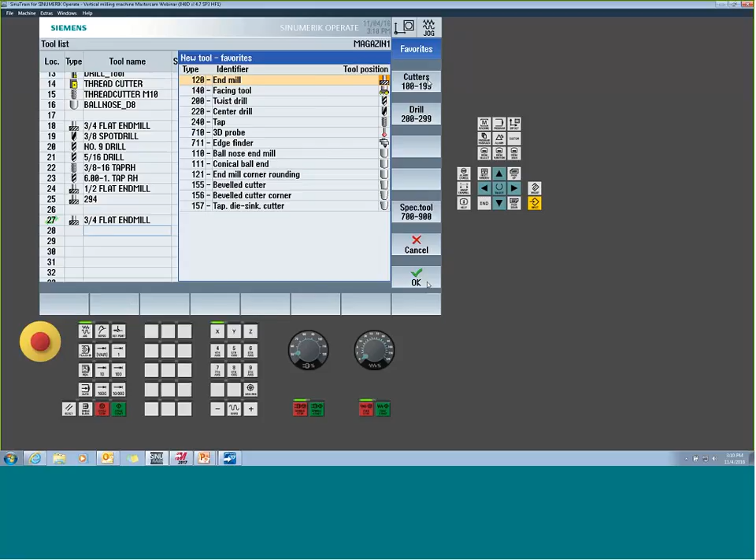Now, I can do the same thing with the physical numbers. So I can have 294, and now that 294 is associated with this 294. But from an end user perspective, it's a lot more confusing to a guy to think, why do I have two 294s in there? It makes more sense to say, okay, I got two 3/4 inch end mills in there. That makes sense. So it's really just to keep it a little easier on the operator's perspective. It'll work either way, but certainly from the operator standpoint, it does make it a little simpler.

The other reason why we like to use name tools is you have a comment here, right? So at any point in time, I don't have to remember, I don't have to be looking at the diameter of the tool. I'm digging in a program, I don't have to look for a comment section. I see the tool, I know what the tool is. I'm not trying to figure out what was tool 94 again. So that's another reason.

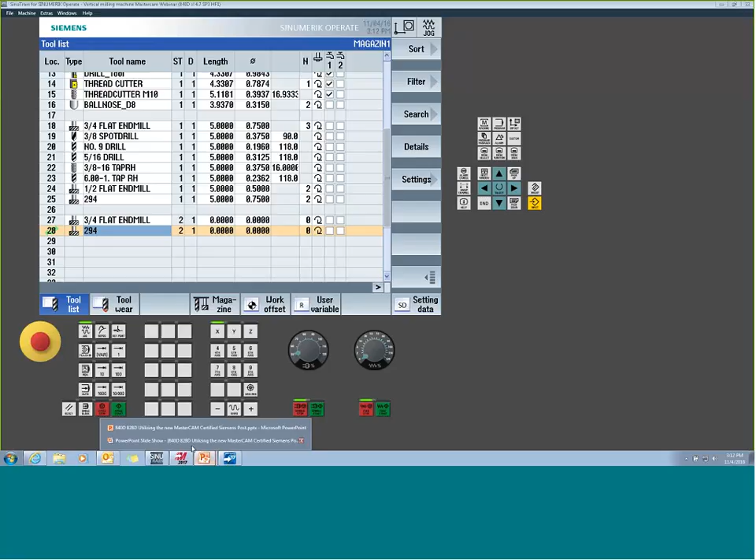So Jeff asked, how do we get access to this post? Earlier I had mentioned, and I'll jump back to the slide in it, as long as you have a login into Mastercam, go to mastercam.com, log in with your user login, and go down to the Tech Exchange section.

From there, when you go to Tech Exchange, you will see a list of all the available posts. You just highlight posts, you can do a search for your version. I think when you first come in, it always defaults to 2017. But if you need X9, you can pick X9, do a hit search, and it'll show up. Right now, I think there's just us and one other post currently in here.

And we got in there first, mind you. Anyway, but yes, you will find it right there. Now, if you don't have a login to Mastercam and you have a valid SIM number, I believe you can just go in and create the login. Don't quote me on that. You may want to talk to your Mastercam rep to verify that.

But I'm pretty sure if you just go through, register with them, I think you link it, because I think that's how I did it originally. You link it to your SIM number, and then you can have access. If that's too confusing, I would certainly say the other option would be to request it through your reseller, and you should be able to get it right from your reseller as well.

Would Mastercam and Siemens develop more posts for other controls? Great question, and yes. So what we're doing is this was the first kind of lead in to this partnership, for lack of a better term, or mutual venture, shall I say. So we wanted to start with, let's face it, probably one of the most common posts, and especially a building block for other more advanced posts.

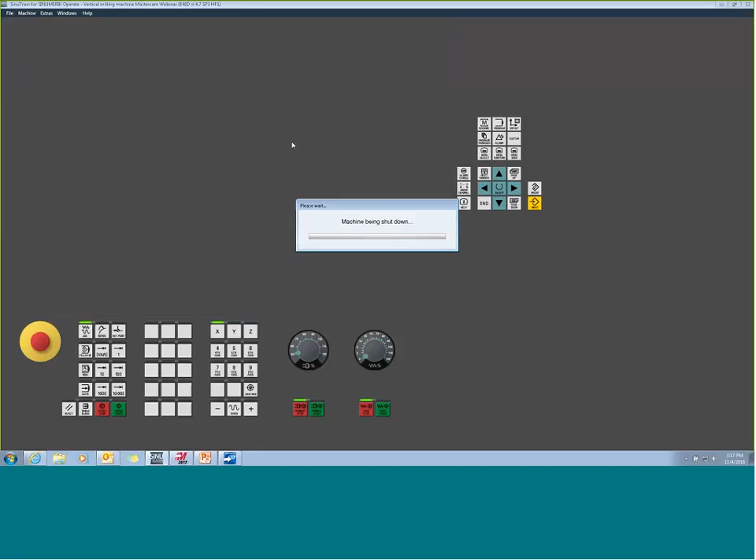Is SinuTrain free for Mastercam resellers? No, unfortunately, SinuTrain's not free, but we do have a new version with 4.7 where if you're using the demo machines, you can use it without a necessary license. So SinuTrain itself has a pretty broad range of capabilities. If I look at SinuTrain here real quick, I'm just going to shut down this one machine. It is advanced to the point where I can actually pull physical backups out of customers' machines, and I can build a virtual machine in SinuTrain.

So we create what's called a digital twin. So like here I see a DMG Mori DMU50. That DMG Mori, I built this from an archive out of a machine. If I go in and run this, it's cloning the guy's machine. So there's some pretty advanced functionality you get within SinuTrain.

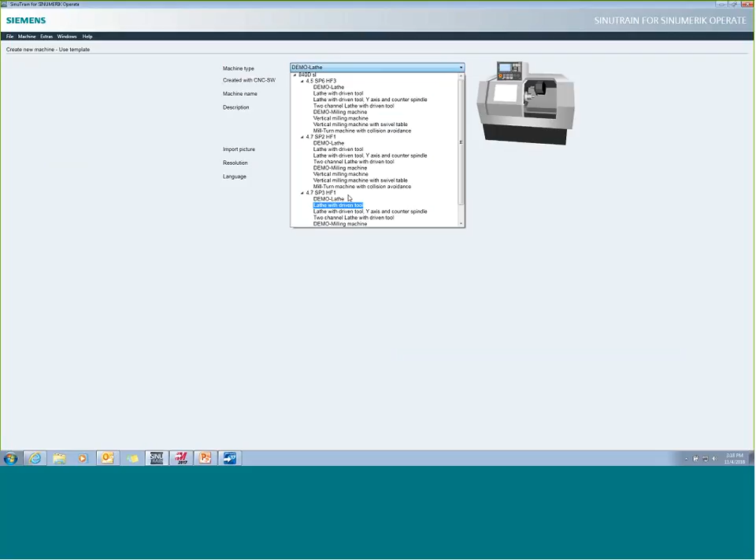And if it's something that you feel that there's a value for you guys to have, you can purchase SinuTrain. That's not an overly expensive piece of software. Should be under $3,000. But with that being said, if you want to play around with SinuTrain, what we do allow you to use is we have these template machines. And when you go to create a template machine, as long as you build the demo lathe or the demo mill, so that would be a standard 2-axis lathe without live tooling, or a 3-axis mill,

you do not need any license. So my suggestion for you, if you think that this is a tool that would be handy for you, download it, install it, run either of these two machines. So you just build the demo lathe or the demo mill. And then moving forward, if you want to get into more advanced machines, 5-axis machines and stuff, you could always add the license later. You don't have to uninstall the software. It's the same software. You end up adding a license into it.

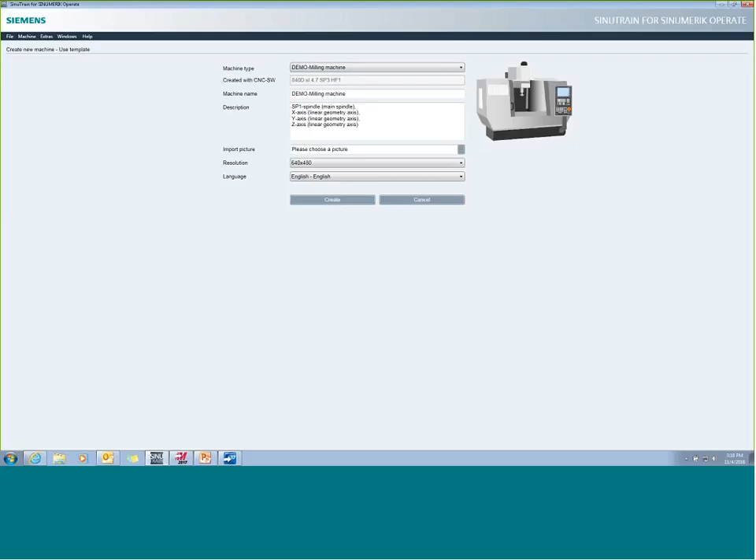Now, as far as getting SinuTrain, if you go to that CNC4you website I mentioned earlier, that was in the top, you can put a request in and we can send you out a CD. There are also links I could send you if you want to email me for a download. The only problem is it's big. It's a couple gig. So we tend to find that the mechanism for download isn't always the greatest.

While using tool names for tool load, it's required. Requires quotes, but if we... Oh, I think the question really is between tool names and tool numbers, the quote scenario. So if it's a tool number, the quotes aren't required. So T1, T2, T3. You can build it with quotes if you want a commonality on your side, so you could say T equals quote 1, end quote, or T equals quote 30, end quote, but it's not required.

When it comes to the name of the tool, however, my half-inch end mill or whatever, that has to be within quotes. So most of the time I have guys, if they're using numbers, just do T and then whatever the number is. If they're using true names, embedded in the quotes. I believe that was your question.

When do you think the 4th and 5th axis post will be available? Weeks, months, years? Probably not weeks or months. Hopefully, I would expect within 2017 we'll probably get to the 4-axis mill. Once we get the lathe done, which will happen pretty quick, the 4-axis mill is going to happen real fast because it's really already 90% done. It's going to be this post, just adding 4-axis functionality. The 5th axis, I would be shocked if we get onto that before 2018, to be honest with you. All right.

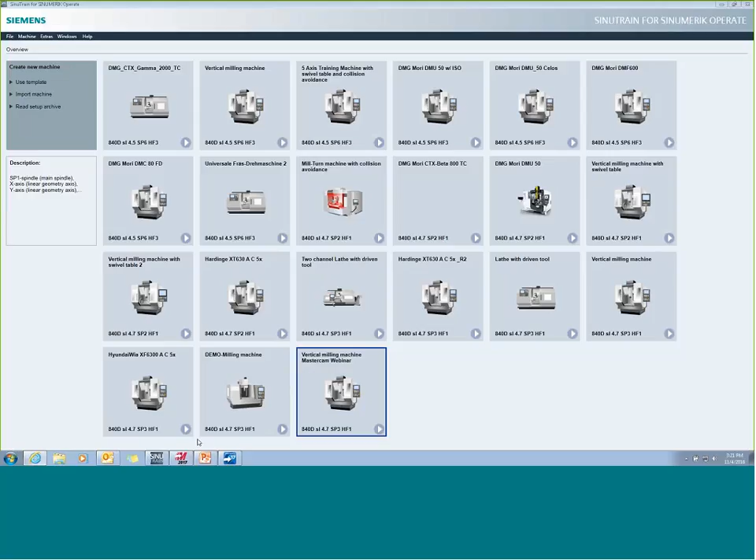Oh, this was one we didn't talk about. So what if I don't want to use the canned drilling cycles from an output standpoint? So that can all be changed inside of Mastercam. Just because we built the cycles doesn't mean that you have to take advantage of them. Some guys don't want to see the cycle output; they want to just see G1s and G0s. So that's one of the things where you would go into that control definition file.

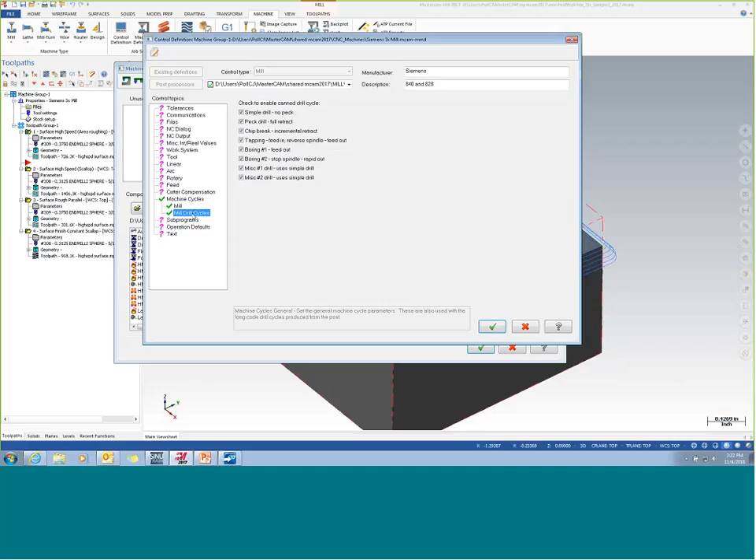So if you go and you edit your control def, inside the control def file, there is a spot under machine cycles and mill drill cycles. So in here, right now we have it checked for the system to utilize all of these canned cycles. If you uncheck these and just save this file and come on out, if I repost the drilling cycles, it will not post with any of the canned cycles. So you won't get the CYCLE82 or the CYCLE83. It'll literally just put out discrete rapids and feeds.

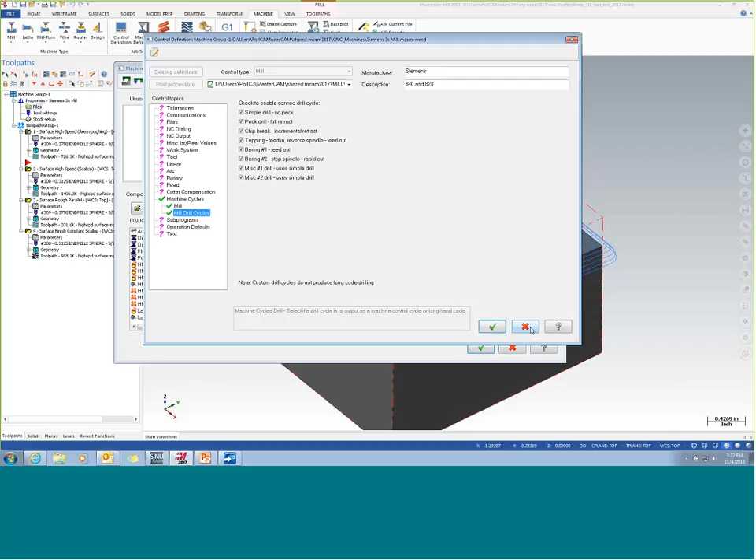So this is one of the things that, in working together, we were able to educate Mastercam on about our control that will dramatically give higher performance and quality in the Siemens control. And it's kind of counterintuitive to a lot of other controls. We're usually used to the more data we give it, the slower everything goes. Well, for us, number of decimal places can significantly help alleviate rounding error issues.

So believe it or not, I've walked into numerous service case scenarios where a guy was complaining about surface quality, cycle time, and just strictly by increasing the number of places, I was able to reduce his cycle time because there was less rounding error and increase his surface quality. So we were able to maintain higher rates of velocity because things were physically connecting better, and the surface quality came out better.

So our standard rule of thumb in any post, and I don't care how simple the machine is: 6 places for an inch program, 5 places for a metric program. And that's what we have Mastercam automatically doing here. You can go out to 8 places. I mean, the more places you give me, the better off you're going to be. It's not going to affect us. It's only going to affect us for the better.